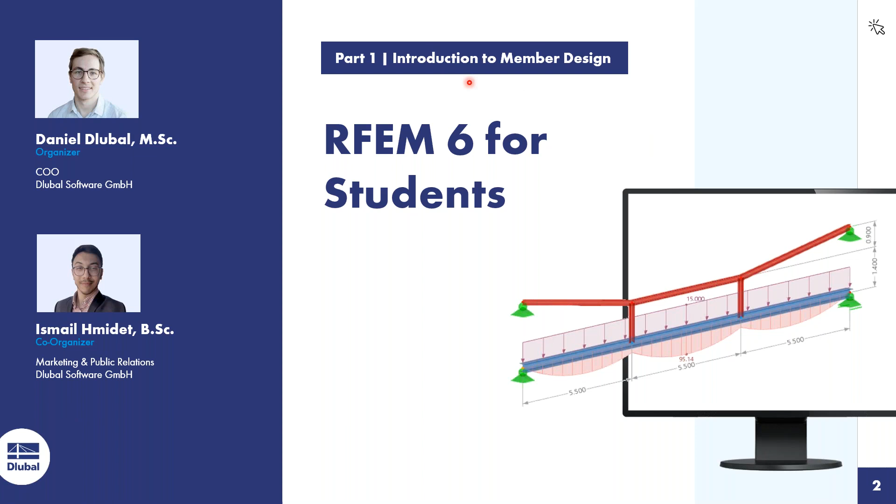So first part of this online training series, RFEM 6 for students. We have the part of the member design today. So we will give you an introduction to the member design and a few words to our platform, GoToWebinar. So you use, I guess, the web version. So you see it here a little bit like that.

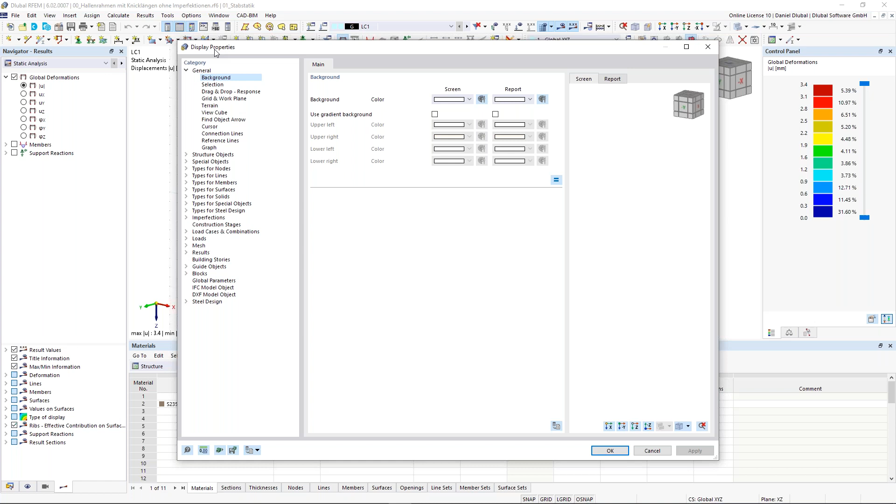Options is quite interesting. I work with a white window, so maybe some of you use a black window, no problem. When I go here to the display properties, I have the possibility to change the background, load a dark background. When I click on that, it changes to dark, and I use the dark background. So it's up to you how you will use it. I prefer the white background, so I go back to options, to display properties, and choose the white background and click OK.

We have today a lot of international students, so for those it's interesting that we also offer the program language in different languages. So let's click here on program options and settings. And here in the tab of settings, you have the possibility to choose a program language from those here. So for French, Spanish, Italian, and so on, guys, we have this language. I have here also some other options, but for now it's enough to know that in the menu bar you find all necessary functions and commands and so on.

Then we have here the symbol bar. The symbol bar is a fast access to the most important symbols you need during your modeling, calculation, and load application of your structures. If you want to create a member or lines, just click on that, and then you can create it. I love working with them, it makes the whole process very fast, and also some visibility options here and so on.

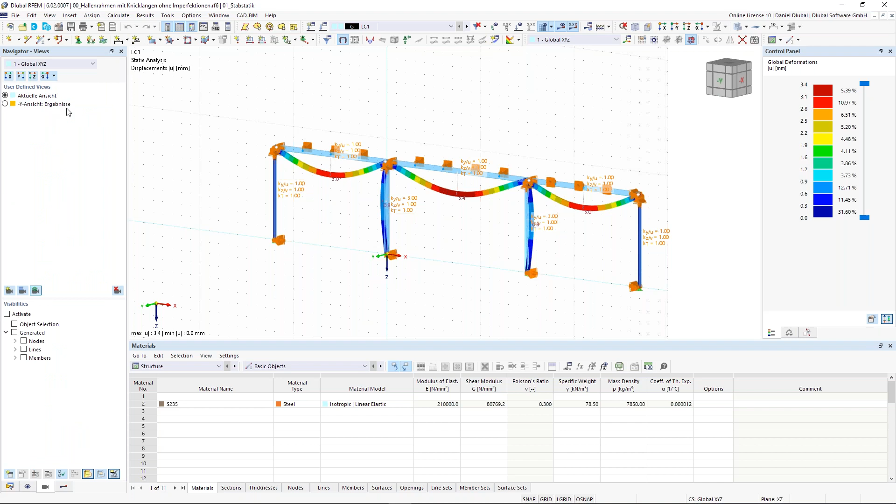Okay, the next navigator is the view navigator. Here I have the possibility to create user-defined views. Currently I see the structure from that view, and when I just want to see the results from the global y-axis or against the y-axis, I can click here and I see it like that.

Then I have also the possibility to set up some visibilities. I activate, for example, members and choose the member by section. I am interested in the IPE profiles, and I see it here like that.

Perfect, so let's jump to the last navigator, the result navigator. Here I have the possibility of showing different results, in this case the global deformation. When I'm interested in the internal forces, I activate the members, activate the internal forces, for example normal forces, bending moment, shear forces, and of course also the support reactions.

Yeah, so much to that. Then we have the tables, where you have a whole overview about all objects. You can also create objects in the tables, edit them, and change values. This is a huge advantage because it gives you a very structured, very good overview, which is very clearly structured.

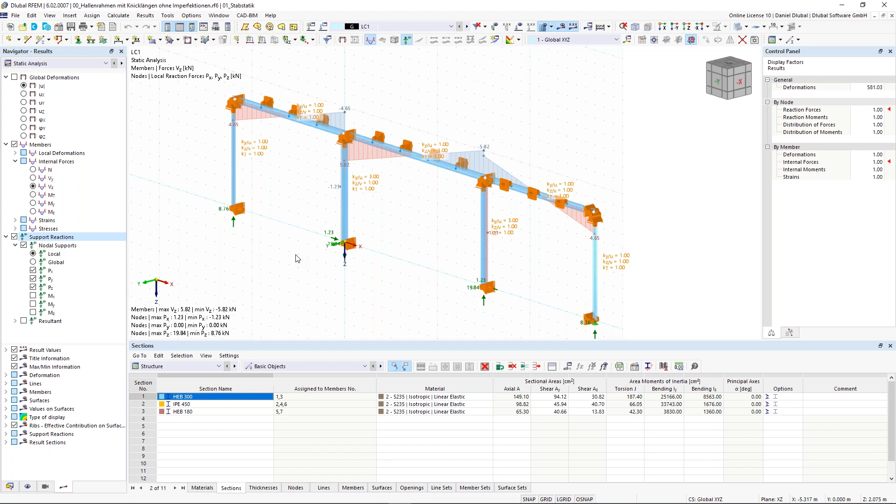Okay, now the control of RFEM 6 is quite easy. It's familiar when you are familiar with other software applications like CAD programs, AutoCAD from Autodesk, then you will get familiar also with RFEM 6.

So with the left mouse button, I can select different things. When I go from the left upper corner to the right bottom, then I can select all objects which are included in the selection window. When I go from the other side, I select all things which are also in this window, but not as wholes. I can select them as whole object. So everything that is touched within this selection window will be selected.

Okay, so much to that. When I want to select more objects, I click here on one object like this member and press the Control key on my keyboard, and now I choose another. I add new objects to my selection by pressing the Control key.

So in this case, I select here different members. And when I want to deselect some members, just press the Shift button and I deselect some objects from my selection.

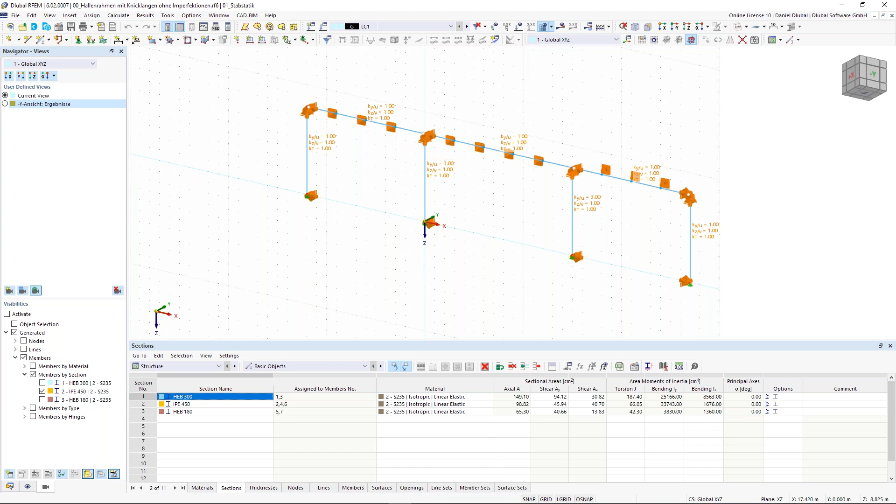Very nice. You can also use this view cube. It's a new function in RFEM 6 that makes it a lot easier to change your views for your structures.

Okay, good. Yeah, this was it regarding the introduction to the user interface of RFEM 6.

RFEM 6 is a 3D FEA program for the calculation of members and trusses, but also for surfaces, shells, and solids. With RFEM 6 as the main program, you can calculate and get the results of internal forces, stresses, support reactions, and deformation.

When you want to perform different material-based designs like steel design, timber design, and concrete design, you need the add-ons. The add-ons will be part of our later trainings in 3 or 4 weeks, when we jump into steel design, concrete design, and timber design.

Okay, now let's start with a very simple example. For those who would like to model with me, follow my steps. I create a new model by clicking here in the file menu and selecting create a new model.

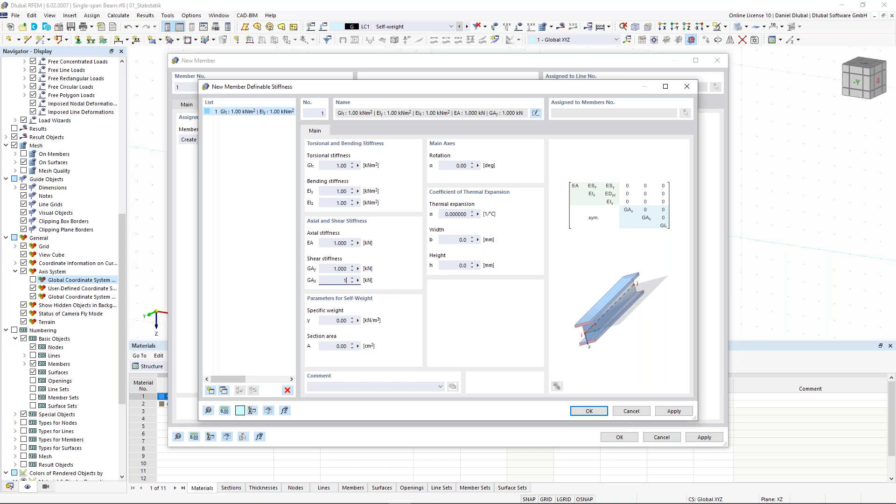I go here to the register Definable Stiffness and I create here a new stiffness. Click on that. And now I insert here very small values, because in reality we have higher values, but for this example it's enough to insert here a kind of pseudo stiffness. Okay, I click here on OK, click again on OK, close the member window, and then you see, here we have the member activated, and I click on OK, and the example is ready. So you see here this member.

Now we need support. I go here again to the symbol bar, click here on Assign Nodal Support, and I choose here the hinged support. So I will activate all translational forces. Choose here this node, right click in order to close the function, and now I go here back again and choose here the support with the roller in the X direction in order to release the X forces, and now I have here a single beam.

I can show the supports a little bit bigger just by right-clicking on it. I can adjust the size of the graphic, and now I activate load. In RFEM, when you want to create loads, you have to assign them to load cases. And with every new model, one load case, in this case the self-weight, is already created automatically in the background. So I jump here to the load case, go here to Edit Active Load Case.

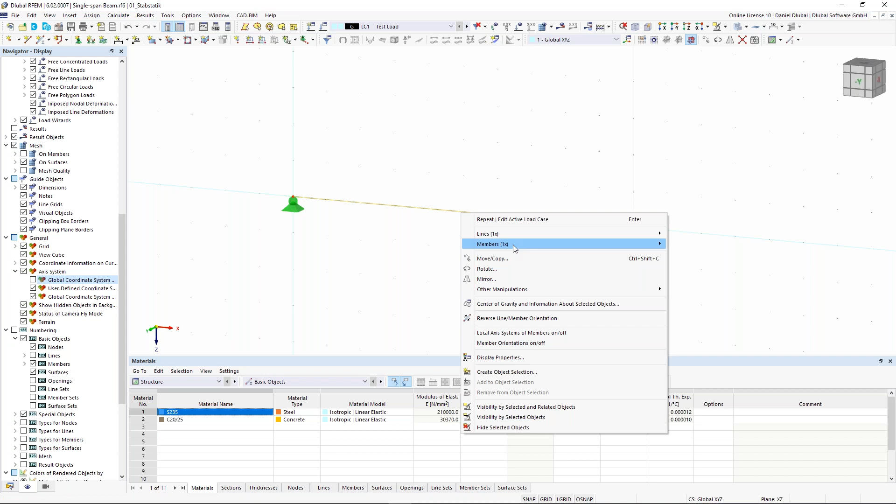And now I divide here this line, because in the middle of this member I want to create a node, and on that node I want to create a single load or point load. So right click on this member, and I divide it by distance. And now let's enter here the value of 4.5 meters. The other one is calculated automatically. And now the important thing is Create On-Member Nodes Without Dividing the Member. So activate here this option.

Then we get a node which is part of the member and doesn't divide the member into two members. So I click on OK. And now you see what I mean. We have here one member and this one node, part of the whole member. And the member wasn't divided into two members. It's a huge advantage, because then I can take a closer look at that member as one member. So, and now I create my single load.

I go here again to the symbol bar, click here on New Load. And now I click here on Assign to Nodes. So here I select the node in the middle. I can draw a selection window, click on OK. Enter here a value of 10 kilonewtons. I say OK. And we have here the node. So, the next thing is calculating the structure.

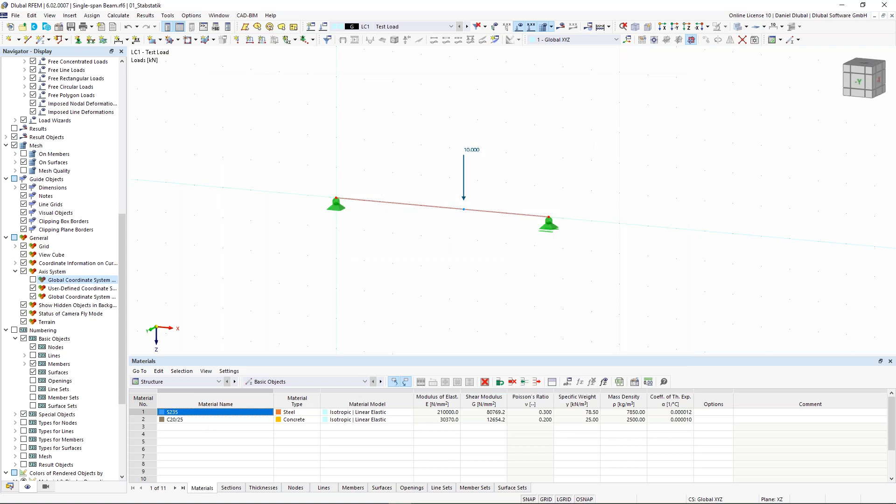Okay, so first of all, we see the deformation. The deformation is, of course, a little bit nonsense, because we have 99,000 millimeters deformation, because we don't have any stiffness. But in this case, only the internal forces are interesting for me. When you have statically determinate systems, the stiffness of a structure doesn't have an influence on the internal forces. Only when you have statically indeterminate systems does it have an impact.

Okay, so I go here to members in the results navigator, and I activate the shear force. I see the shear forces in kilonewton, and then the bending moment, My, 18 kilonewton meter. Interesting. Now I activate the support reactions. I see the support reactions, also pretty interesting. And now you can make a kind of plausibility check: compare the support reactions with the shear forces, for example, and they are the same.

So this was the first example. Pretty simple, of course. For the next examples, I will use real cross sections, because this makes more sense in my opinion. It was just an example for when you are at the beginning of the semester, you have started your bachelor, and you calculate some structural systems. Normally, you don't have any information about the stiffness, and here you have the possibility to consider these kinds of exercises.

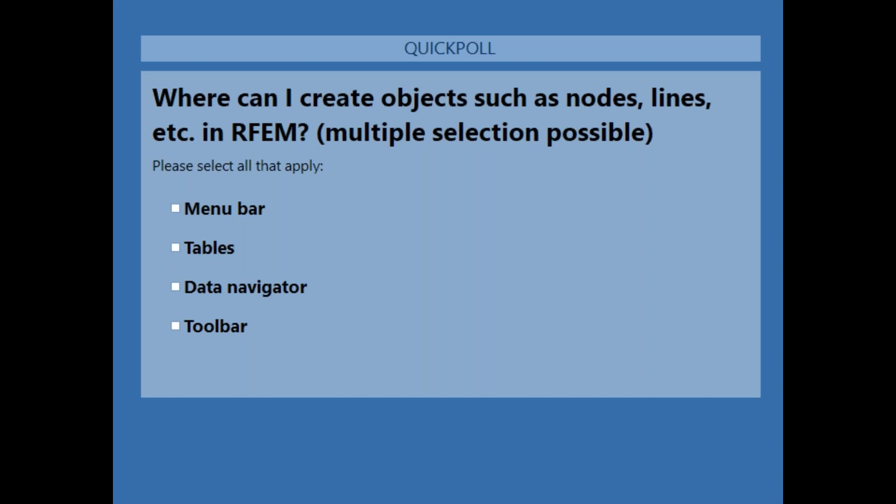Okay, this was the first example, and I have also prepared a question for you. It's a multiple choice question, so more answers can be correct. Okay, good. I will close this and share the results. It was a multiple selection, so several answers can be correct, and in this case, all shown answers are correct. I can create objects with the help of the menu bar, tables, data navigator, and also the toolbar. Okay, let's go forward with the next example.

This example is also for those who want to do this in parallel with me. Daniel. Yes. Before we move on to the next example, I just wanted you to highlight the difference. I got the question: what's the difference if the member were split into two? There's no difference in terms of structural behavior, right? Exactly, absolutely correct. There's no difference in the structural behavior and the results, just in the result interpretation.

It makes it easier for you because you can choose this one member, and when you would like to see the results at one member, just right click on the member and create a result diagram, and you see it as one result diagram. Or when you want to adjust or edit several members, and you have several nodal point loads, then it's easier for handling and usage. So there's no difference in the structural behavior and the results, just in the handling of how you define these nodes. Exactly. Thank you.

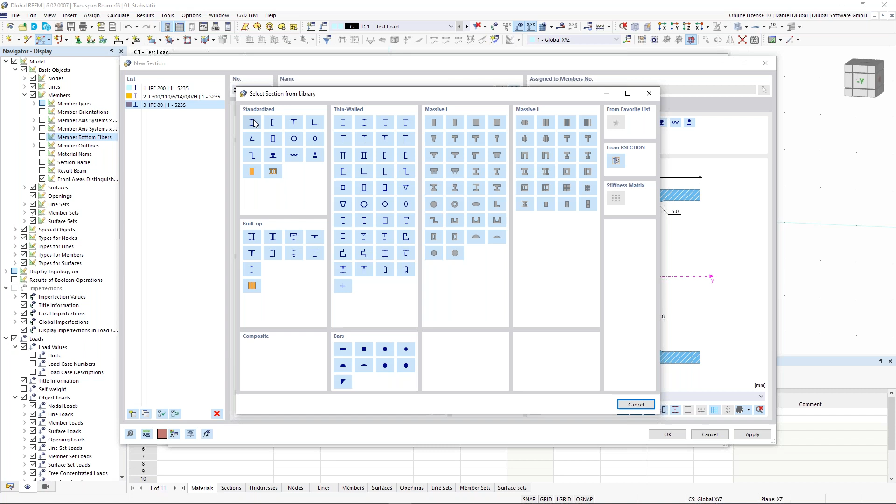And I open here the cross-section library. And I am looking for a standardized profile, so in this case, an HEB profile. So I scroll a little bit down and then I will find here this HEB profile. I refer to the Euronorm, so more to the Eurocode. And here I find HEB 300. This is absolutely fine for me.

When I know the profile, then I can also insert here the name of this profile, and this makes your searching for the profiles much faster. So just insert here HEB 300, and you jump here to the existing profiles based on our search function. And this makes this whole thing very fast. And now I choose here this Euronorm, double click on my HEB 300 or just press OK.

So, and the same thing we can also do with the material. I use for this profile an S235 material, so steel with a yield strength of 23.5 kilonewton per square centimeter. I can also create here a new one, searching for it with the help of the search function. So I can enter here S235, and now I can choose here the one I would like to have. But I don't do it because I have it already here in this case, so I cancel it. And I just need here this one. Okay, I click on OK.

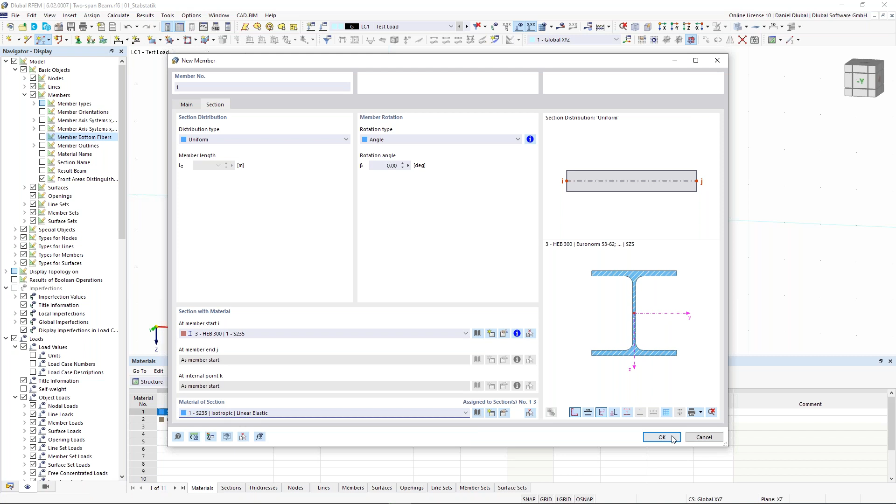And now you see here for my member start, I have here this HEB profile and this material. I click on OK. And now I create a beam with a length of 5 meters. So just go here to this grid point, 5 meters, and again 5 meters. So the total length is 10 meters, but in the middle I have here this node.

So the next thing is that I want to have here support directions. So I activate here this nodal support again. And now a very interesting function in RFEM is that we have here also this apply button. And I show you how it helps you to assign different objects easier for your structure. So for the first node, I would like to use here this hinged support. So I choose here this hinged, this node, click on OK. And now I don't click on OK, but I click on apply.

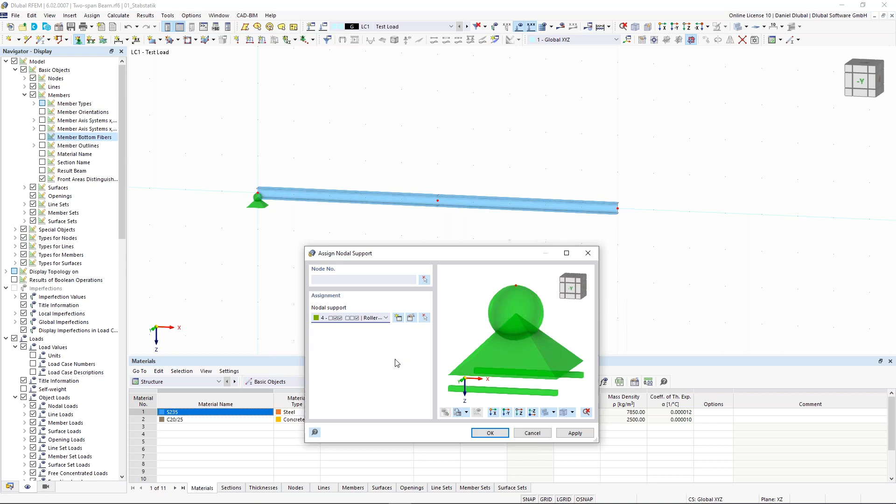And this node will be created automatically. And the next thing is that I change here the nodal support, choose here roller in the X direction, and select both nodes with a selection window. Click on OK again. And now I click again on apply. And now you see how easy you can do this with this dialog. I click on OK. And now you see here the structure. Perfect.

So what's next? The next thing is that we consider now different load cases. Because when I refer to my PowerPoint, I will show you my PowerPoint. We have here this two-span beam, the information about the profile and so on, and also here 3 different load cases. And I would like to combine them in order to determine, first of all, the results like support forces, internal forces, and so on, but also the governing or leading load combination that causes the largest internal forces, because we will have here also 2 additional load cases like the imposed loads, at first for the left side of the beam and then for the right side of the beam. Okay, let's go back to RFEM 6. Let's do this.

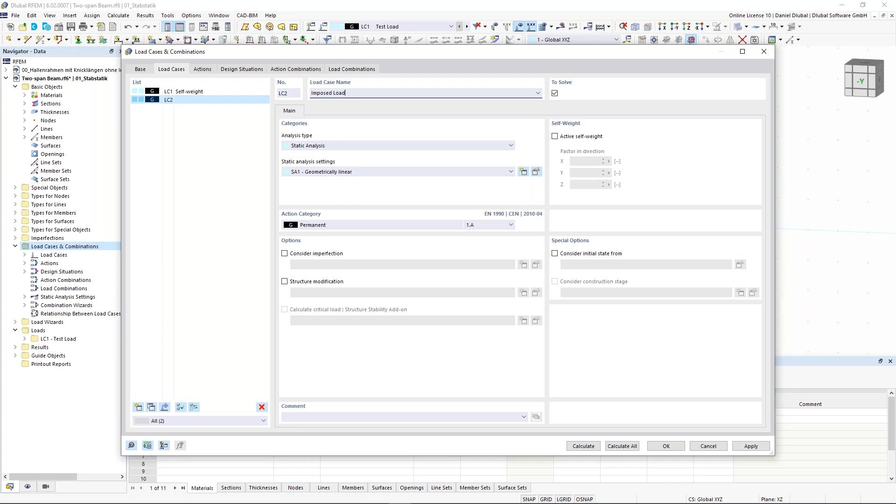I activate here the self-weight. And I create 2 new load cases. So the new load case is imposed load left. I choose the correct action category, in this case imposed loads category A, according to my European standard. And now I copy the load case and say right, because with that load case I apply the loads on the right field of this member.

Okay, now let's go through the tabs. So actions, I think this is pretty clear. I have here this permanent category, so permanent loads, in this case the self-weight, and here we can see which load cases are affected by this. Then imposed loads, these two load cases, and I have here different action types. Oh, come on. Different action types, alternatively, differently, and simultaneously.

When I choose simultaneously, this means that both load cases can be combined with each other. Alternatively would be they would exclude each other. So simultaneously would mean that load case 2 can be combined with load case 3. Alternatively, load case 2 with load case 3 can't be combined.

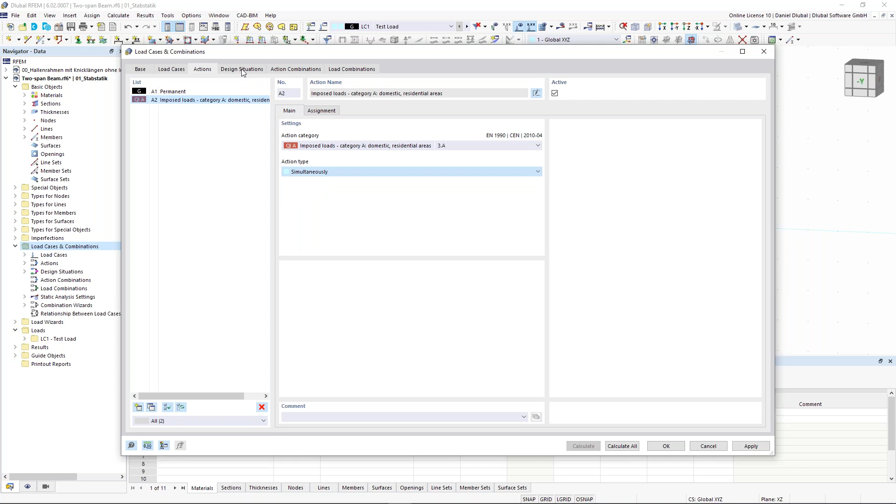Okay, so let's go to the design situations. According to the Eurocode, the European standards, we have different design situation types. The serviceability state isn't interesting for me, so I delete them. Just the ultimate limit state. I go here through the information, and here you see short information about the combination rules. So the permanent factors, partial factors, and also here some combination coefficients. So it's interesting how the program combines the factors for the load cases.

So now you can see here the action combination. Now let's jump to the load combination, and let's pick this one. So here you can see the partial factors, that is 1.35 times load case 1 plus partial factor 1.5 times load case 2, and so on. And now here you see also these leading load cases or leading action categories. It's pretty interesting just to know how the program considers these different load combinations. A load combination is nothing else than a combination of different load cases under the consideration of these partial factors and combination factors. Okay, I click on OK.

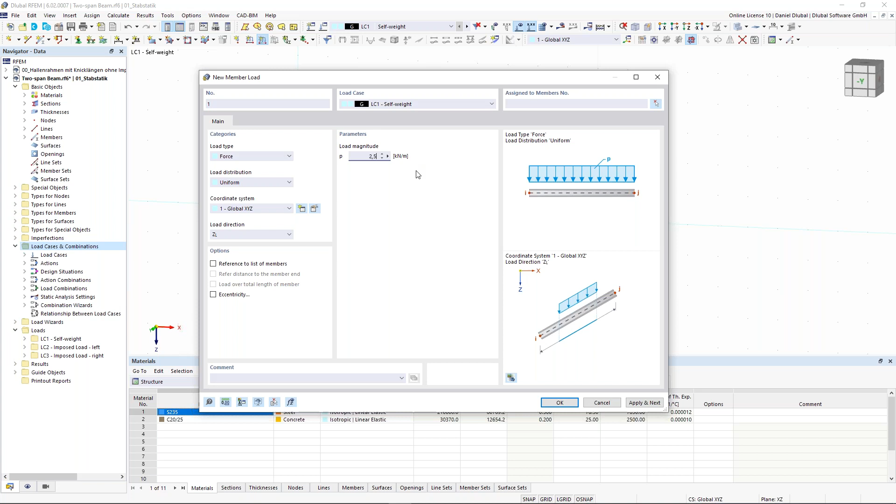So I click here on load case 1, self-weight. The load magnitude is in this case 2.5 kilonewton per meter. Now I select the members, draw a selection window because I want to select all members. I click on OK, and now apply and next. And now this is a perfect thing: I can change the load case, change here the load magnitude to 5 and assign it to the other member, but stay in the same dialog. This is pretty nice. Makes a lot of fun for me.

I click on OK, say again apply and next, and the same thing I do for the right load. So for the right field, click here the right field, click on OK, and then in this case it is enough when I click on OK. So let's make a kind of plausibility check, go through all load cases. I have here the self-weight, the imposed load left, then the right one, the ultimate limit state. So this will give me an overall result of all load cases. Oh, and here we see it with the partial factors.

So maybe some of you know already what I want to reach with that example, because I want to see which load combination is responsible for the highest field moment and for the highest support moment. And this can be done with this ultimate limit state, with this design situation. So now I would say, let's calculate it. In this case, I choose here calculate all.

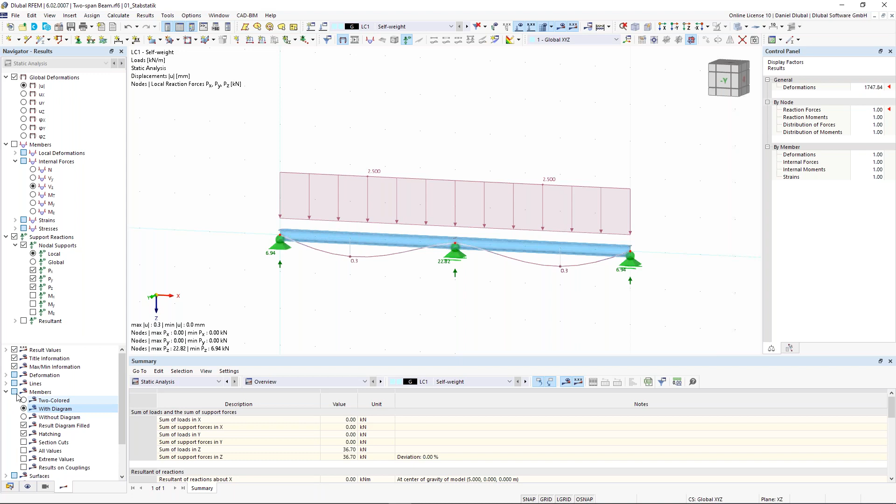Go here to the chapter of area members, with diagram, and here deformation, section colored. So this is a deformation, sorry. So the area deformation, members and section colored would look like that. You can see here on the right side a kind of control panel where you can see these colors.

Okay, the next thing is the verification of the vertical or the support forces, and I see here as sum, the sum of loads in the Z direction is 36 kilonewton, and the same sum here in support forces, so there is no deviation, and this is good for me. Okay, the next thing is, let's go to the design situation.

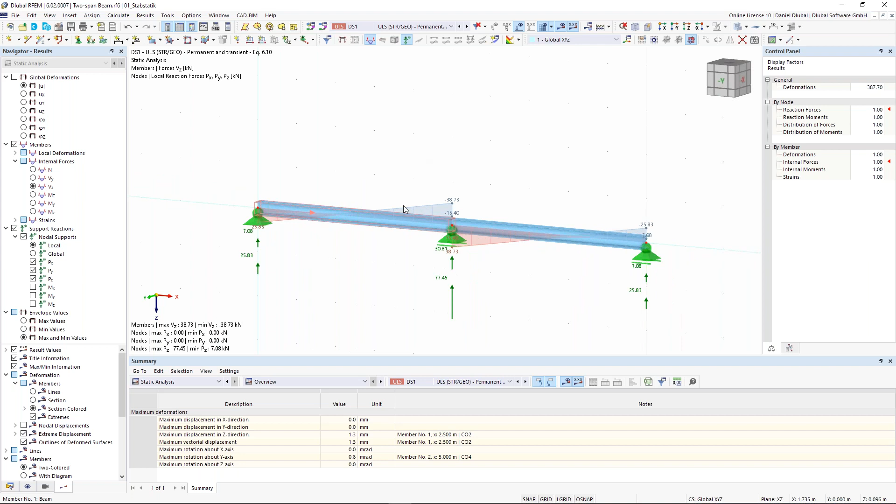And as I said before, I want to see envelope values. So let's go to the members, and now you see here different kinds of distribution values of the shear forces and also the bending moment. And I can say, okay, please show me the maximum values. So in this case, the maximum field moment. And when I take a look at the minimum values, I see it here. So the minimum is here, minus 37. So the support bending moment.

Okay, this is the summary, and now it becomes interesting because I want to see the results by member. So I go here to the table, static analysis, results by member, and I go here to the internal forces, and now I want to take a deeper look at the maximum field moment and the maximum support moment. So the most minimum and the most maximum value. And here I go to the extremes area, and here I see these two results.

So I see here the maximum value of the bending moment My, and now I see also the corresponding loading, and this is in this case load combination 2, and for the minimum value it's load combination 3. Now let's take a deeper look at how the load combination looks. So load combination 2 was this one. I think this is pretty clear. And load combination 3, here we have the support moment. Okay, this can be done with the design situations, a pretty interesting tool and function to know.

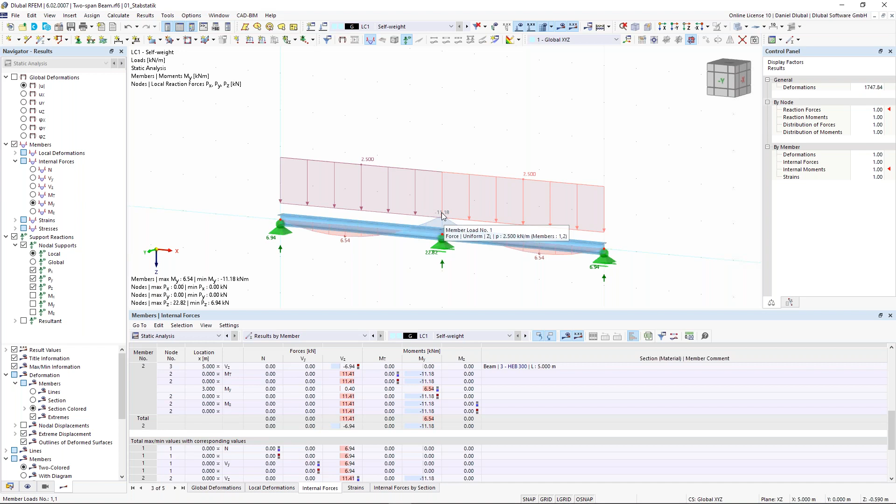What is the shear stiffness? Taking into account shear stiffness leads to an increase in deformation due to shear forces. In order to deactivate it, you have to go to the cross-section and then you can deactivate it. So remember here the support bending moment of minus 11.18 kilonewton meter. I go here to the sections, in this case HEB, double click on that. And now you can see here deactivate shear stiffness.

And the influence of the shear is dependent on the cross-section areas Ay and Az. When I deactivate, they have no value, and the shear stiffness isn't taken into account. And this can also be considered for your hand calculations. Because when you calculate by hand, with the help of some tables in your books, then it is kind of rigid. The books take no shear stiffness into account.

But in reality, there is a little bit of shear stiffness, especially when you have solid cross sections or timber cross sections. However, it is recommended to consider the shear stiffness for the deformation analysis. But just in order to show you the different results, remember minus 11.18, I click on OK. I calculate this load case again.

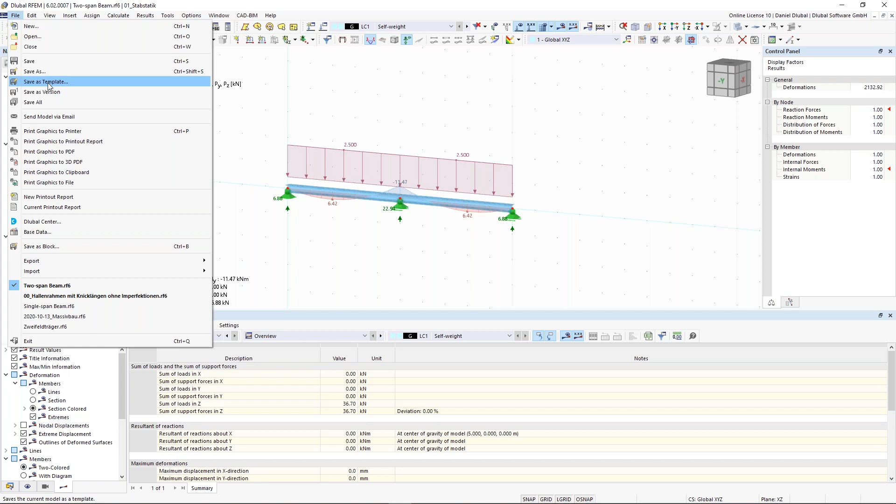And they actually asked, what if we're talking about codes or standards of different countries? I think you could probably show that we do have a lot of different standards predefined in RFEM. And in case you don't have the standard you need in RFEM, of course you can define those and save them as a template, as Daniel just showed. Exactly, right Daniel? Exactly, you're completely right.

So if you want to take a closer look at the standards we support, go to your project or model and right-click base data, or also here in the symbol bar you find this option, click here. And as Ismail mentioned, we support different standards. Just go to the add-ons, you can activate maybe for steel design different standards. So I click OK, and then you see that we support different standards, and also here the different national annexes.

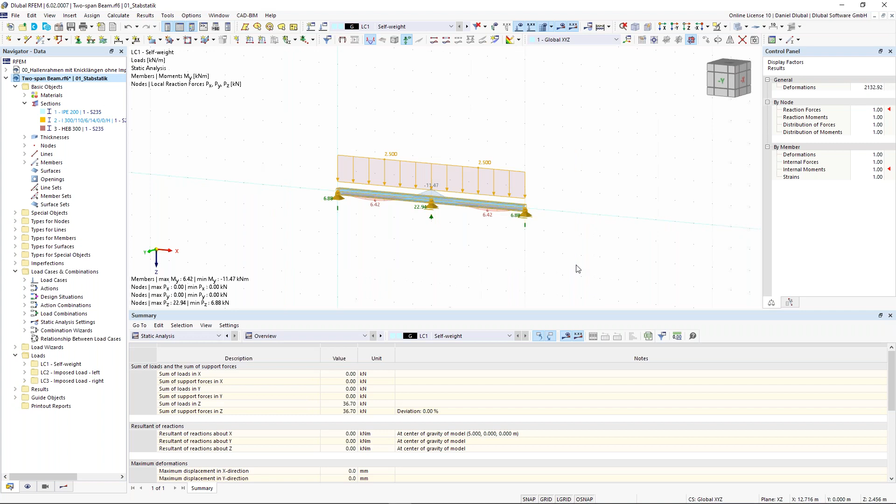So let's continue. Now I will do an example by myself, so I will make it a little bit faster. Just watch and learn. I delete everything again - oh no, sorry, I don't want to delete everything. Now I want to add hinges. This is one-time statically indeterminate, so I want to add a hinge here in order to make it statically determined.

So how to do that? I click on this member, then I change the visibility mode for better visibility, to this wireframe mode. Then I right-click on members and divide the member by distance. And now I would like to divide this member at a percentage of 17%.

Why 17%? In my German student book, it's called the Schneider-Bautabellen. There's a hint that in order to make the support bending moment and the field bending moment equal, the perfect location of the hinge is from the middle of the support, 17% of the length of one of these fields. So I click here on 17.16 - this is given by my table book. The division point is calculated automatically. Then I click on OK, and a new member was created.

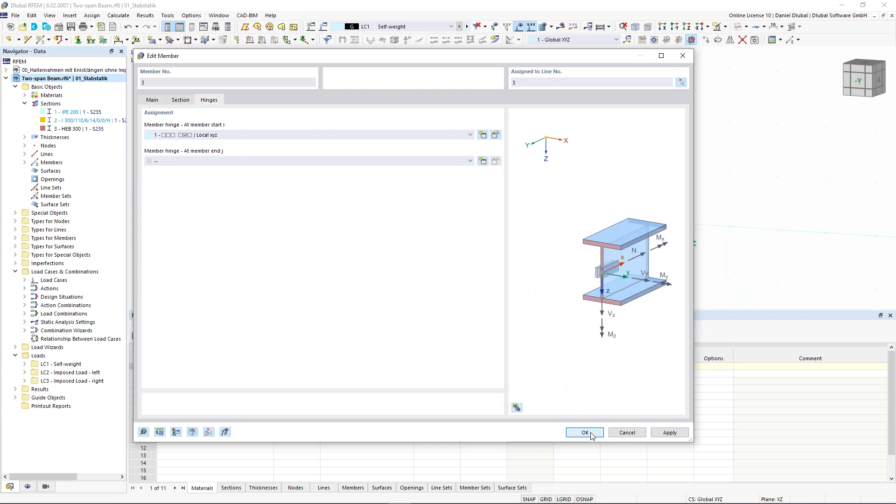Right click on this member, local axis, and the other thing is the member orientation. Now you see it: from left to the right, the direction goes from left to right. This means I have my starting node on the left side and my end node on the right side. The member orientation is compatible with the local x-axis of my member, and there I can also see the local axis.

So much to that. I deactivate this, and now I calculate this structure again. Watch out, pay attention, and see what will change.

We have assigned here a hinge, and this hinge means that the moment is 0 there, and it is 0. Additionally, we see that the field moment is 7 kilonewton-meter, and the support bending moment has the same value.

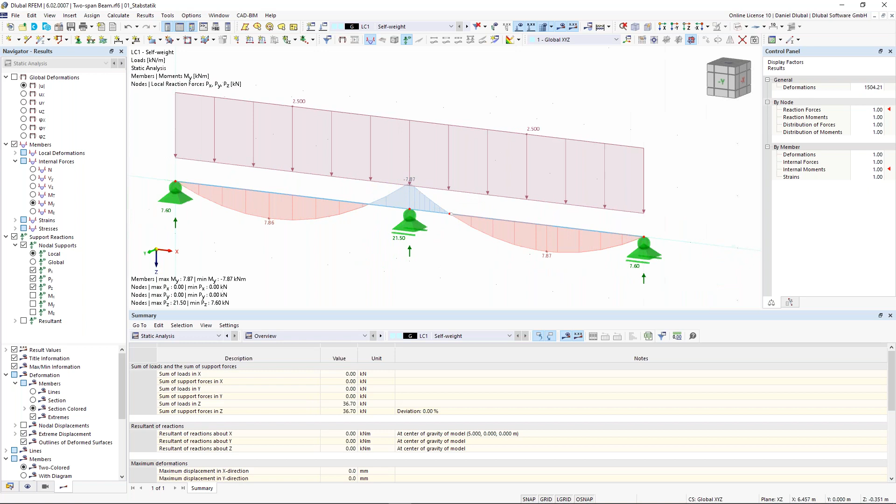Okay, so in your studies you work also with variables and parameters, and I want to show you how to do this also in RFEM. So when you have the exercise that this two-span beam has a length as a parameter L, and this has a parameter, and this has a parameter, then you can do this also for RFEM 6.

So I go here to structure. This is something you don't have to do with me right now, just pay attention, I will show it to you. I have here these global parameters. I click on global parameters, and now I give them a name, L for length. Then I press the tabulator button. The unit group is in this case length, and the definition type is in this case value.

So I insert here a value, but I can also give the whole thing a formula, but in this case a value. I insert 5 meters and comment it with 'length', so I know later that L is length in meters. And the same thing for this distance, this E, so this 17%, I give it the name E.

And now I don't want to use a unit group here. I want to use factor, because it refers to the existing length by giving it a kind of percentage. And I give them 0.1716, and this is the factor. Okay, I click on OK.

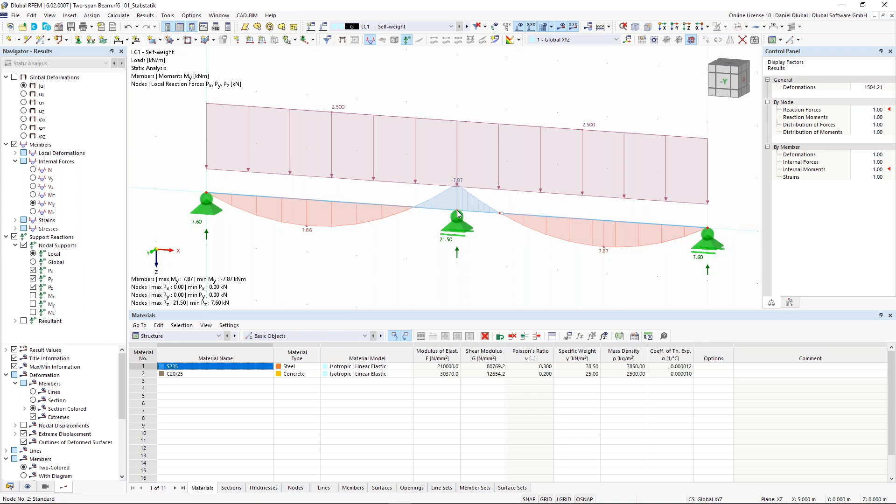Now I have to assign these parameters to my structure by manipulating the coordinate system or the coordinates. So the first thing is that this node will remain at its position. The next one needs to be changed. So I activate, double click on this node.

I want to manipulate or set the formula, give the x coordinate the parameter L. So I click on this arrow, click on edit formula, and insert here just my L parameter, and click on OK. Click again on OK.

And the same thing here for this node. I activate the formula, and in this case it's L plus the factor E times L again, which gives 5.858. I click on OK.

And last but not least, I do the same with the last one here, just pressing 2 times L. Click on OK. Click on OK again.

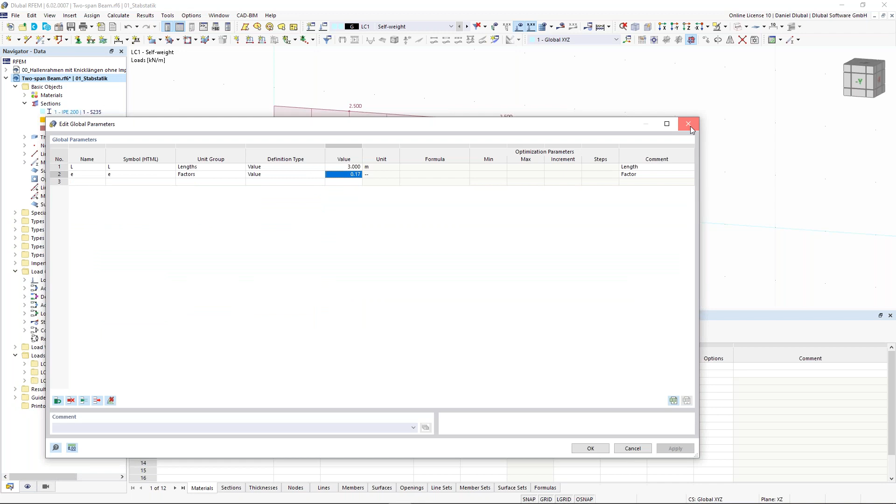And now I want to change the values, so pay attention to the structure. I insert here the value 4, let's do 3, and say apply, apply. And now you see how the structure was changed through these parameters. Interesting. Okay, so much to the parameters.

Next thing is just a structural system with various types of loads and also some supports. So I delete this again.

Now I will create the nodes with the tables. I go here to the structure, go to the tab nodes. So the next 2 examples you don't have to do with me. I will do it a little bit faster, just giving you an overview about how you can do things in RFEM 6.

So I create here a new node, going through the inputs with tab on my keyboard, and now I insert here the coordinate 0 and 0, press enter, and the next coordinate is 5 and 2, press OK, and the next one is 8 and 2, press OK. Now you see here that I have these nodes.

Now I create a new member, the same thing, the section is HEB 300. I click on OK and I connect the nodes in order to create my system. Right click.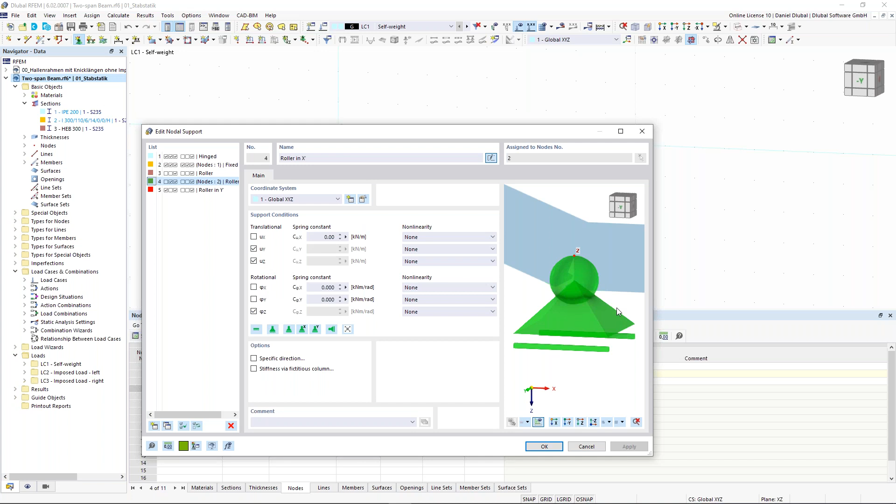So when I want to have this support carry vertical forces, I have to activate the UZ, because then it prevents the deformation in this direction, and therefore I will also get vertical forces. And the same also for the rotations. Okay, so much to that. I click on OK.

And now I leave here this load case self weight, and now I assign or apply some loads. Just various loads, it is not a realistic example. I click here on new member load, and in order to have also some linear load distributions, I can say okay, I want that trapezoidal load distribution.

I will start at the beginning of my member with 10, leave it here as 0, and say okay, at 80% it should stop. I assign it to that member, and this is now the nice thing, that I can remain here in the same window. Okay, apply and next.

And the next member load is another one on the second member. So I activate here 1 and 2, give them here 20%, and choose the second member. I click on OK, and then I click on OK again. And now you'll see here the applying of these member loads, pretty interesting.

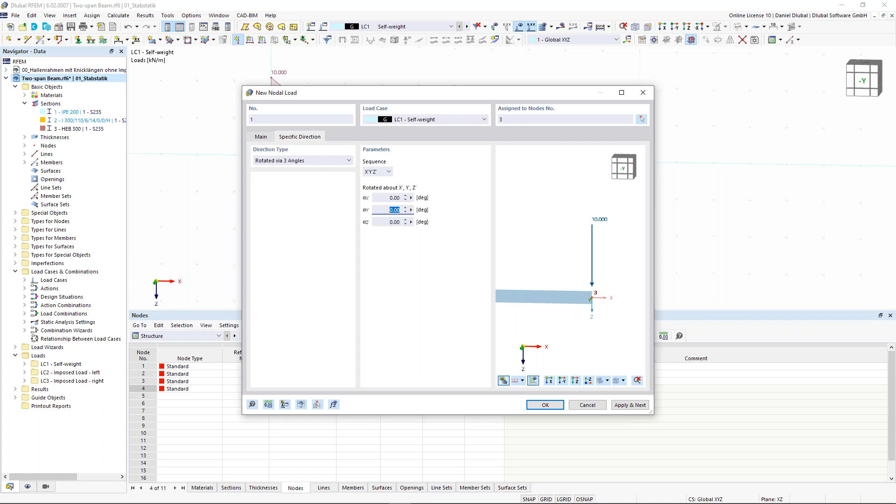And now the interesting thing is that I can see the image where the node load will appear on the whole structure. I can see it here. And now I want to specify the direction, so I activate this option, a new tab appears. And there I say okay, around the local y-axis, minus 60 degrees. And now it looks like that. I say okay. And I see the direction like here.

And one thing more, I can also give some nodes a kind of imposed nodal deformation. So here I find this in the symbol bar. I say okay, new imposed deformation, and in the opposite of the global Z direction I say okay, minus 20 millimeters. I assign it to this node. I click on OK. I say OK again.

Now I will calculate the structure. And for me it will be interesting to see the results regarding the deformation, because I set that node to a predefined deformation in that direction. And now I will see if it's correct.

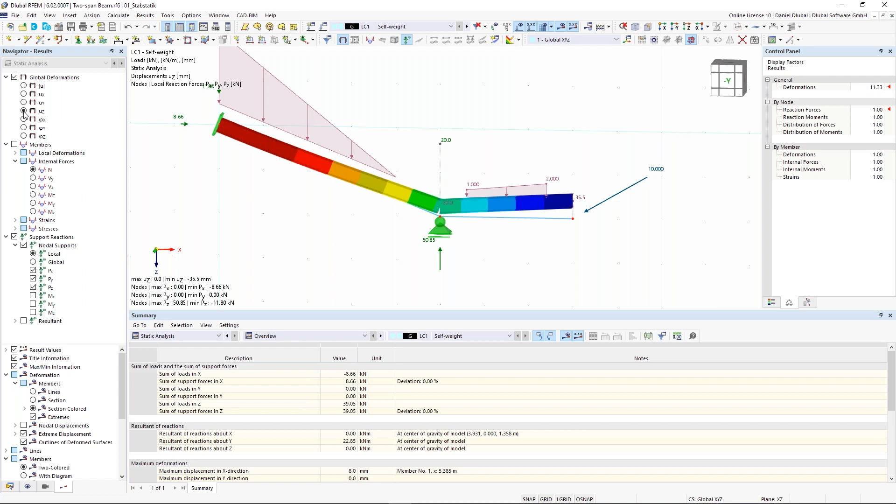Okay, well, internal forces, you can see the internal forces, shear forces, normal forces, and so on. But for me, the vertical deformation of this node is more important. So I activate the global deformation, and now I want to see the UZ, so the vertical deformation. And I just want to see the lines, because then it's clearer to see the results. And yes, it's correct. Although there is a support, we have deformation at the support of 20 millimeters in the opposite global Z direction. Okay, so much to that.

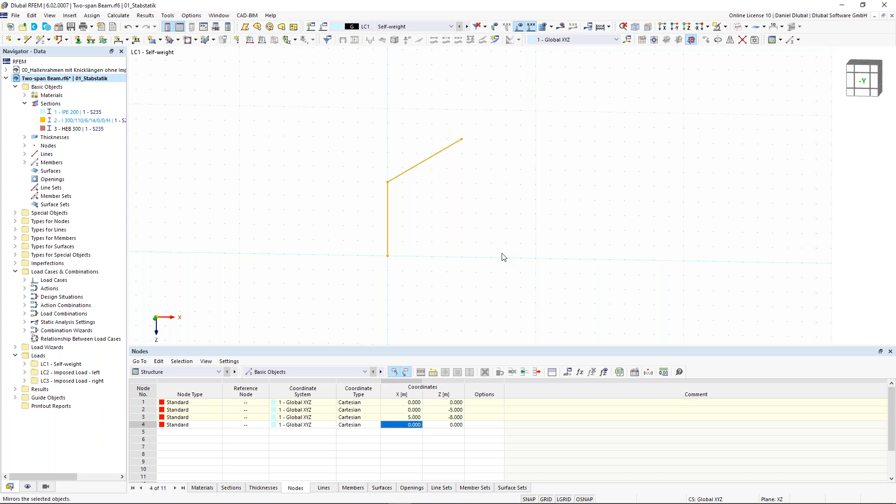Now you can also copy, rotate, or mirror existing objects. So I select the whole left part of the frame, right click, and I want to mirror it. I want to create a copy of that. Choose the point here at the top of the roof, and then YZ should be the plane. I click on OK, and you see now the other side.

Okay, the next thing is that we add an additional rod. And now we have different member types. You can see here the member type beam, and this member type transfers all internal forces to other beams. I can add additional hinges to that beam. Let's do it that way, and then I will explain other member types. So hinges, I activate phi y, so that we will have bending moment hinges.

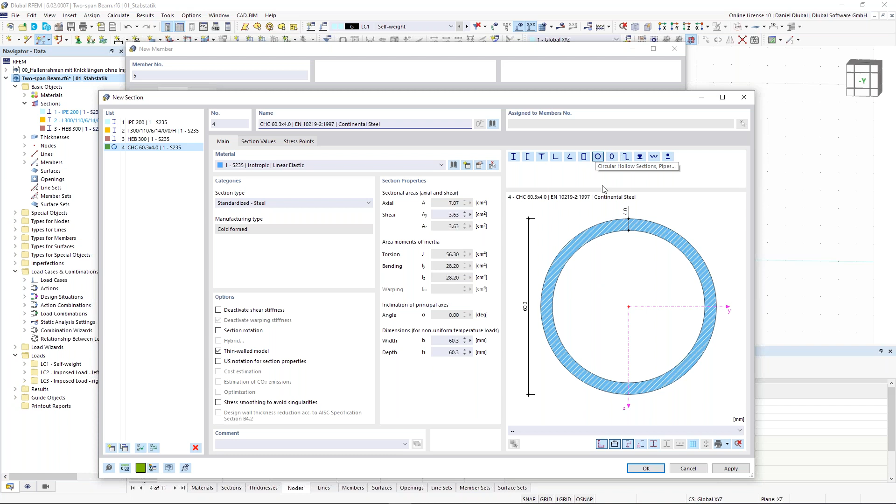And because it will get tension forces, I can choose a smaller profile. So I will create a new profile. I will choose here CHC. I hope it will find it. Okay, and I choose this one. It's a circular hollow section. It can be used for applying normal forces. Pretty nice. And I say okay.

Now I draw this tension rod from the left side to the right side, and maybe I change the display model in order to see the right profiles. And now I create the nodal support, click on OK. And now I apply the loads. First of all, I see my load cases. I have self-weight and imposed load from the last example. I want to change it.

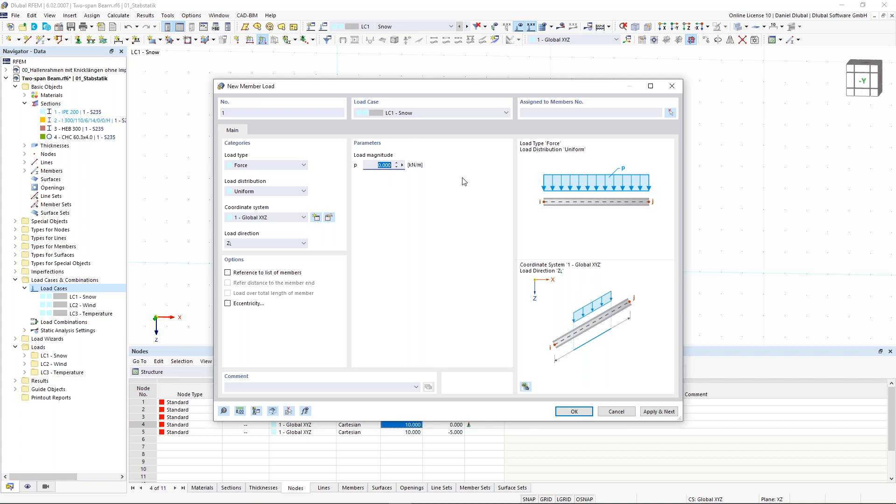Now I apply the loads. I jump to the snow load, go to member loads, and I have 1 kilonewton per meter. And the load direction for snow loads is different. It's not on the true length, it's on the projected length. I choose both members. I click on OK. I say apply and next.

And now I choose the load case wind. Here the direction is the global x-axis. So I say true length, first of all on the column. It doesn't matter if you have it on the projected length or the true length, because the column is vertical. Column, I say okay.

And now I want to refer and apply my load according to the local member system. So I say, okay, I want to have it like that and put it here, because normally the pressures are on the local axis of my inclined beams. So I say apply next. Now it looks like that.

And now the temperature, we will do it here a little bit different. I cancel the whole definition because I wanted to show you how you can make an object selection. So first of all, I want to display different cross-sections with a different color. So I jump here to the display navigator, scroll down to the area of the colors of rendered objects by object property, member, and now I want to see them by the sections, like here.

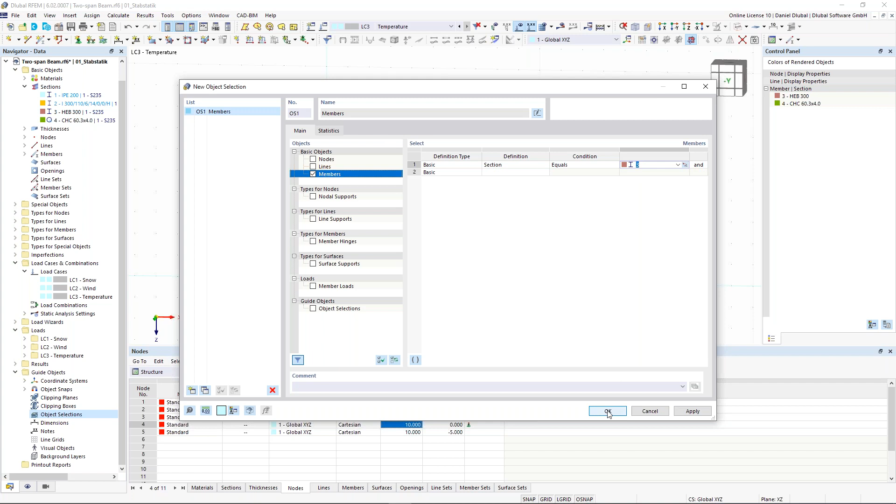And now I want to do an object selection with the type of members. And the definition is the section equals, and now I choose my reference member, and this is this one. And now you see, okay, equals member or cross-section number 3. I say okay, and now, oops, and now I see here these cross-sections are selected by the help of this object selection. And now the nice thing is, now I can apply the temperature very easily, because these objects are selected,

and I choose here the temperature change 35 and local Z, and I say okay. Good. Now let's calculate all load cases. Then we will take a closer look at the results.

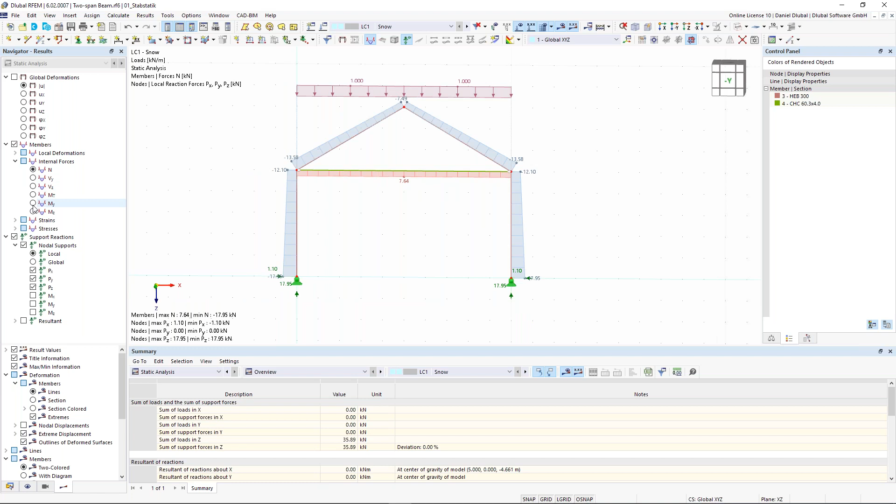Okay, perfect. So as you can see here, maybe for the snow load, you see here the deformation. And also the internal forces, and as assumed, the tension rod gets tension forces. And also when I take a close look at the members, I see it like here and so on. So now we have in RFEM different member types.

This member type is a beam, but with hinges at the end of the member. In order to consider the same structural behavior, I can also choose the member type truss. Truss is nothing else than a beam type, but with moment hinges at the end of the member. Then we have also another thing. This is truss, only normal forces. So only normal forces are activated, no bending is possible. When I have the truss, the member can take some self-weight, and truss only normal forces.

Let's do this truss only normal forces, and you will see how it will affect the results. Yeah, and as I said before, this member type doesn't consider any bending moment, only normal forces. And although we have here self-weight activated and the circular hollow section has some weight, the bending moment isn't considered here because we have the member type truss only for normal forces. Okay, so much for these member types. We will use this member type truss only normal forces for the next examples regarding the truss structures.

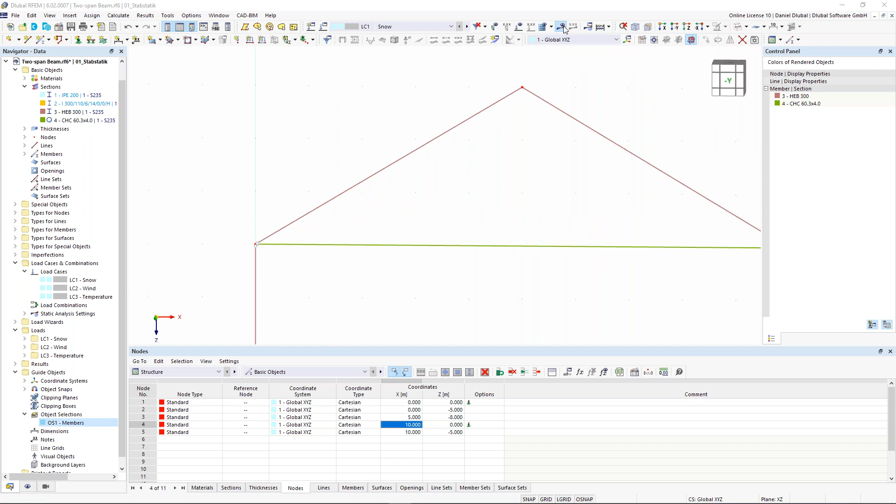So we can test it. I activate it. Yeah, and you see here this error and this failure because we have a singular stiffness matrix, because the structure is unstable in that node because of the chain of hinges. And in order to avoid this, you have to remember just one thing. If you want to build a complete hinge where all members connect, then you have to leave one member without a hinge.

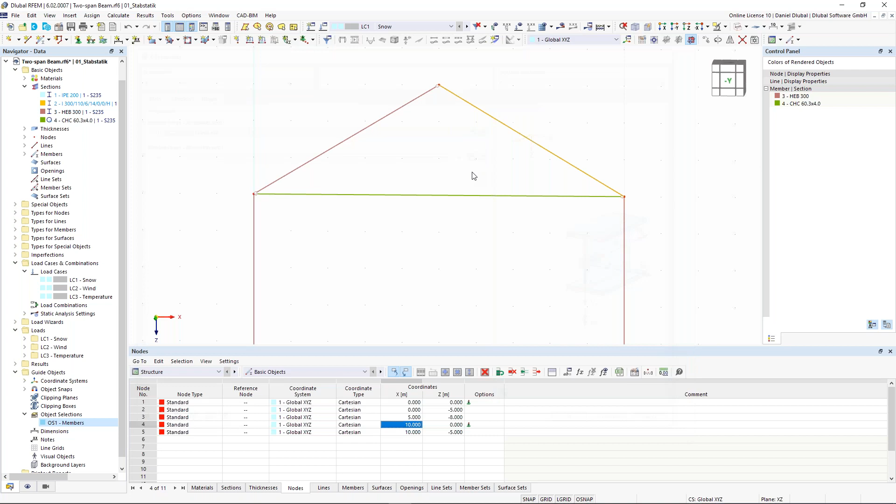So I show you now the correct modeling of this thing. I deactivate here the hinge, and now I want to have this whole triangular thing, where all things are connected with hinges. So first of all, I change these nodal supports to fixed ones, and the next thing is that I assign at the top also a hinge, and the same thing for this member. Click on OK, and this would be the correct definition when I want to consider, I don't know the English word for that, hinges everywhere.

Now I calculate this, and when we take a closer look at the bending moments, we will see that the definition was correct. Yeah, and we see it here. Here we have the bending moment, and every place where there is a hinge, we have zero moments. And this would be the correct definition of the hinges for that case, for example.

Okay, next example: truss. I go here to the PowerPoint. So, ideal truss. We have here a truss with different members, and the members will be of member type truss, only normal forces. An ideal truss is weightless, straight, only carries normal forces, axial tensile or compression forces, and all loads are applied on the nodes or on the hinges. In reality, we don't have any ideal trusses, but in your study you'll learn how to calculate these trusses. And now I show you how to consider it in RFEM.

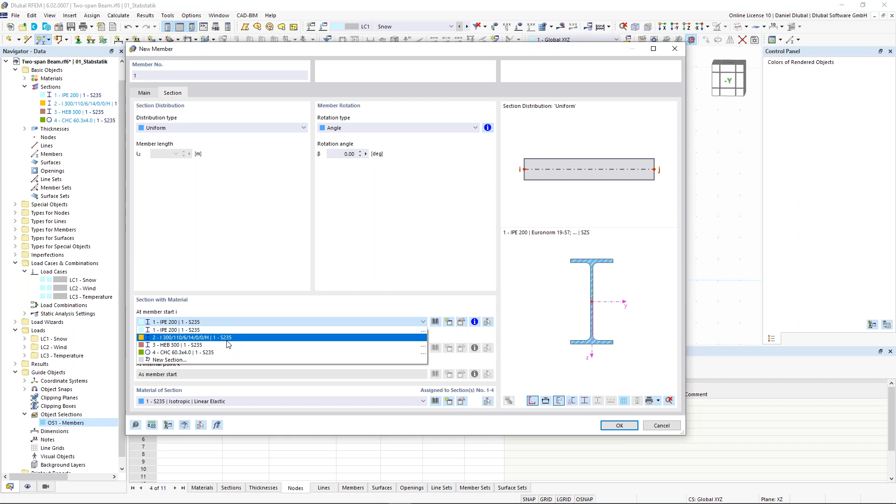And now I put in the length and also the direction. I have here 3 meters. All sides are similar, so I choose this one. 3 meters. Angle in work plane is in this case minus 30 degrees. Then I can do this like this one. I change this. So now I draw, or I can refer to this member. I say OK. And now I have this triangle.

And now, very important, my favorite function in RFEM 6: I select everything here, and per drag and drop I can copy selected objects very easily. I press the Control key on my keyboard, click on the left corner node, and per drag and drop I copy it from there to there. Same thing again. And this is my absolute favorite function. Please remember it, you will use it very often.

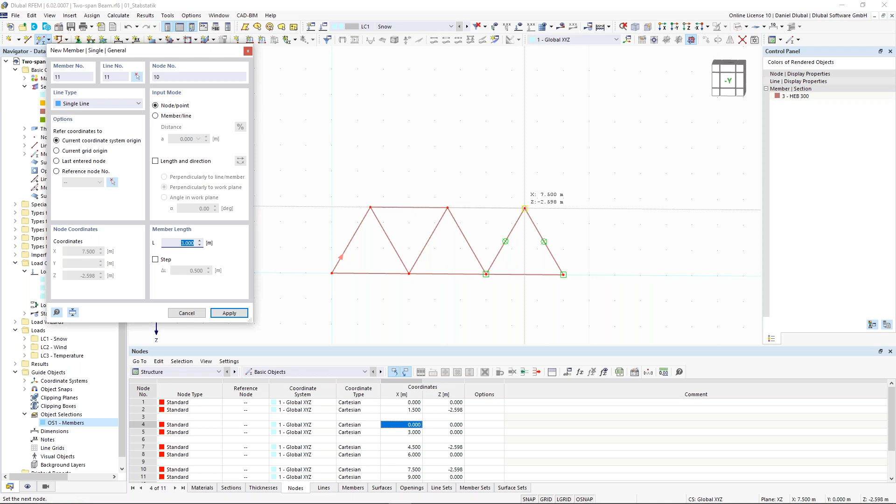And connect here these two members. So, now I have to correct the member type because I saw I have created the member type beam. I select everything, and now when I just double click on one of the members, you see, okay, there are several members to assign, and I choose here truss, and I can change all members at once to the member type truss only normal forces.

Perfect. So the next thing is assigning them nodal supports. I give them a nodal support, hinged, and here again. I make them a little bit bigger, like that. And now I assign to these nodes nodal loads.

So I go here, new nodal load. I select the first node with 10 kilonewton, click on OK, say apply and next, and the next one with 20 kilonewton I assign to the right node, click on OK, and say OK again. So again, show me the results. I say yes.

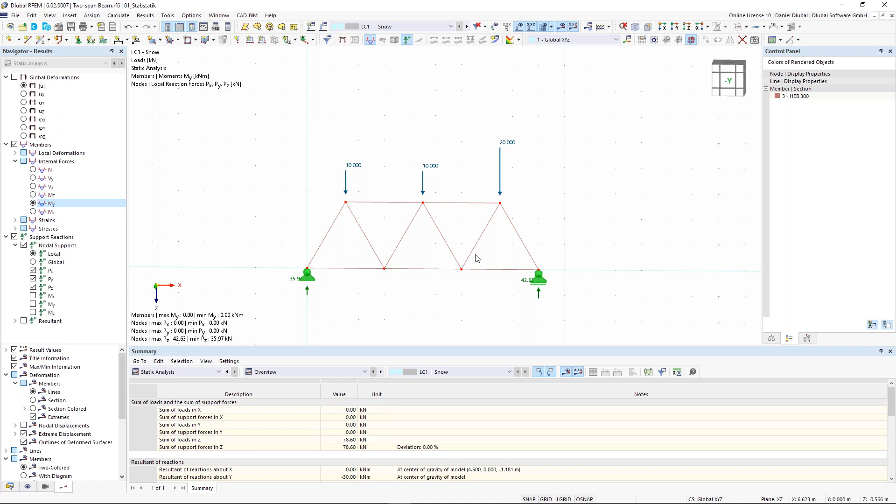And the special thing about the trusses, and also about the member type truss only normal forces, is that only the stiffness in the length direction is activated. So let's take a closer look at the results. And you see no moment, only normal forces. And when you see here member type truss only N, then you see, okay, only normal forces are carried. And only the stiffness in the length direction is considered.

So let's go back to the normal forces. Now remember, all compression forces are in general negative, and in RFEM with the standard display options, blue, and all tension forces are in general red and positive. And you see, here I have the tension chord, and here the compression chord, and here you see the different normal forces. So again, negative normal forces are compression members, and positive normal forces are tension members. Okay, so much to that.

And then there are also some members called zero-force members, Nullstäbe in German, which don't carry any loads. And there are different rules how to determine these kinds of zero-force members. And you can also do this with RFEM. So I will add now these zero-force members. I don't know if the English word is the correct one. I select here the properties, the same like here. Click on OK.

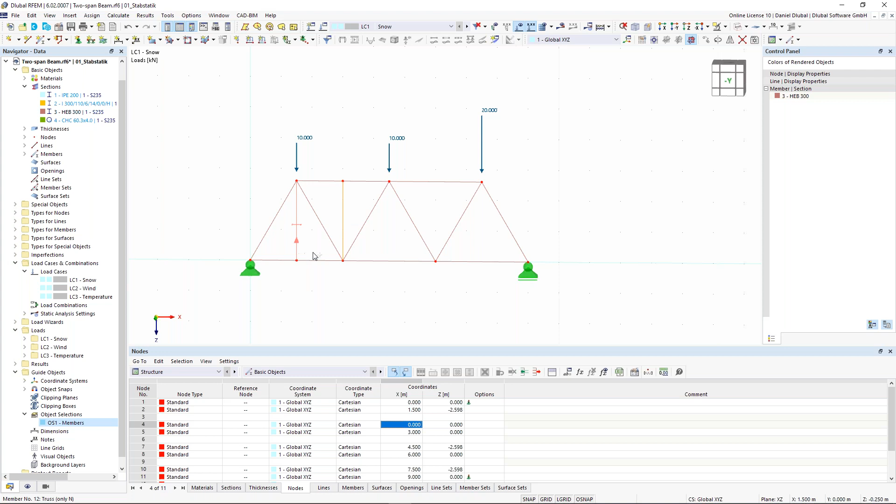And now I draw this member. And now again with my favorite function, drag and drop, press the Control key and copy it from one side to the other one. And now the nice thing is you can also add more things to your selection, and I can easily drag and drop it like that. Perfect. And the last also for that. Okay, good.

And there are different rules in order to determine these zero-force members. These are the members which don't carry any normal forces, but are sometimes responsible and also mandatory for the whole statical indeterminacy. So let's take a closer look at that. I will calculate it again.

And a classical student example would be: calculate this truss structure and determine also the zero-force members, so the members which don't get any normal forces. And also determine the positive and negative normal forces, so the tension and compression members.

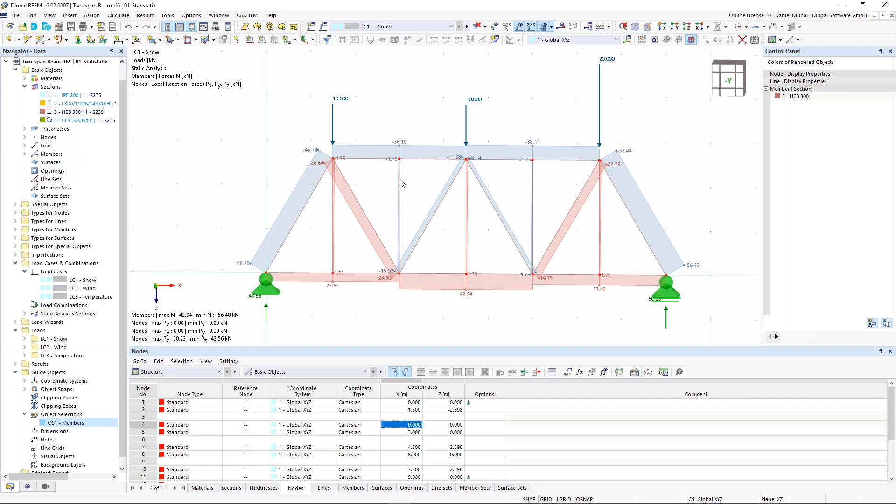As you can see here, these members get some normal forces. This is a little bit strange, but I can tell you why they get these normal forces: because I considered the self-weight. Here in this load case, I deactivate it. Now I calculate it again, and now you will see that these members don't get any normal forces because of their structural behavior. No normal forces. So much to that. Okay.

So I have a poll prepared for you, which summarizes this chapter a little bit. So this one. Okay, let's close this poll. And the correct answer is that compression members are usually truss members with negative normal forces. And in RFEM 6, this is usually the case for these blue colored normal forces, because there we also have a negative value, and now you know it. Okay.

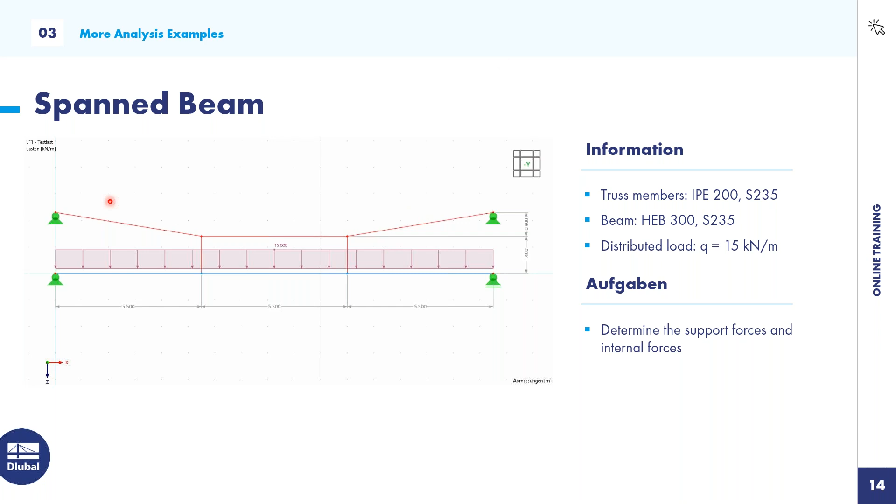So I create here again a member with a HEB cross section. I click on OK. And the length of this member is 16.5 meters. I say OK. And now I divide this member internally into two nodes in order to get two nodes.

So right click on that, members, and divide member now and intermediate nodes because they will have the same length. I click here on 2 and select here this option. This option will cause that the member is not divided into different members, but we will get the node. So here we have the blue nodes, and you see, when I go through the member, it is one member and not three members.

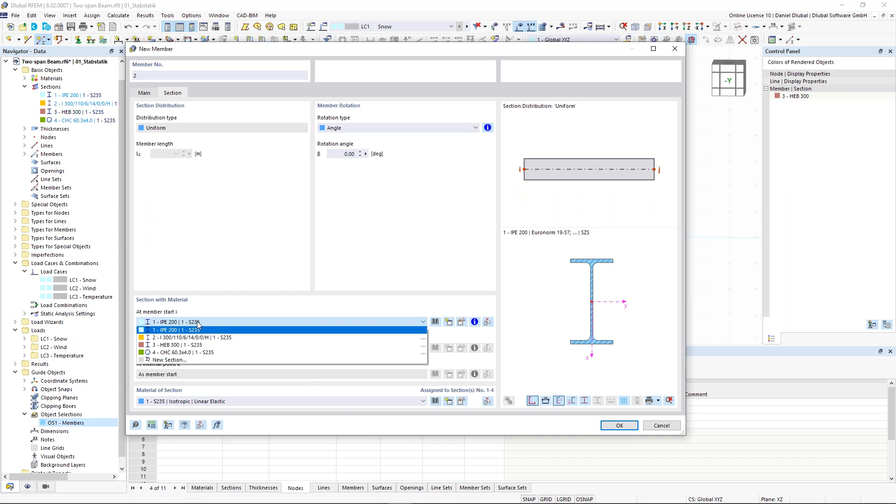But I have here these nodes, and this is pretty nice because then I can refer to this structure more easily and see the results more easily. So the next thing is that we create another kind of member. In this case, the truss, only normal forces. Section is in this case this IPE 200 profile because it's a little bit smaller.

And now I just choose here the length and direction, 1 meter, and go here 1 meter upwards. Here again. And now I want to create here also a member. I choose here these two nodes and these two nodes by clicking on the Control key.

Right click on one of the nodes. I say move and copy. Now I can create a copy of the selected nodes. I say yes, I want to activate it. I choose here the displacement vector at the Z, and this is 2.3 meters. I say okay.

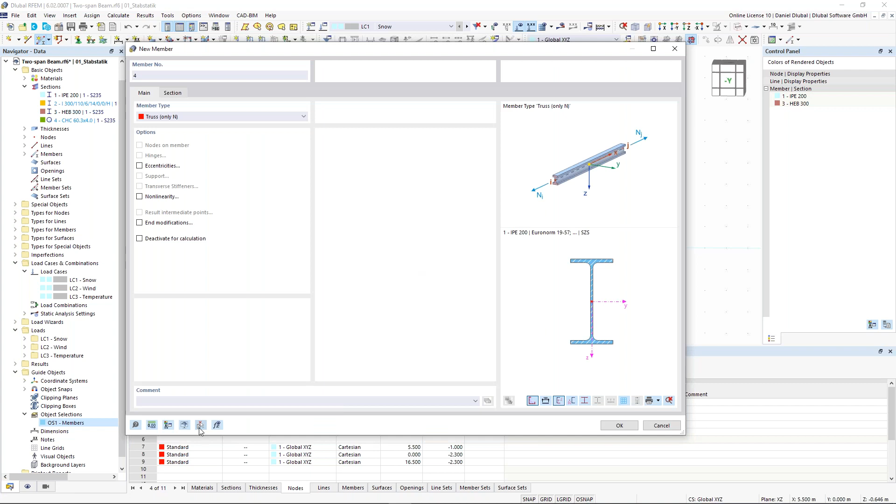And now I will connect these two lines. So I take here this beam. In this case, the truss only N, and I refer to this cross section. So I choose here always this select object properties in graphic. I click on OK. Now I draw it. So perfect.

So I change here the display model, and now I see that these local node coordinates are incorrect. So I want to change them. I double click on one of these nodes, and I can change here the coordinates, and in this case I want to change them at -1.4, so it goes a little bit upwards. I say okay, and now the structure looks like that.

Now I have to assign some nodal supports. I choose here these nodes, give them this fixed support, and the same here for this one. This will be a roller support in X direction. Okay, and now I create also a new member load. I go here, click on new member load, enter here a value of 15 kilonewton per meter, click on OK, and choose here this member.

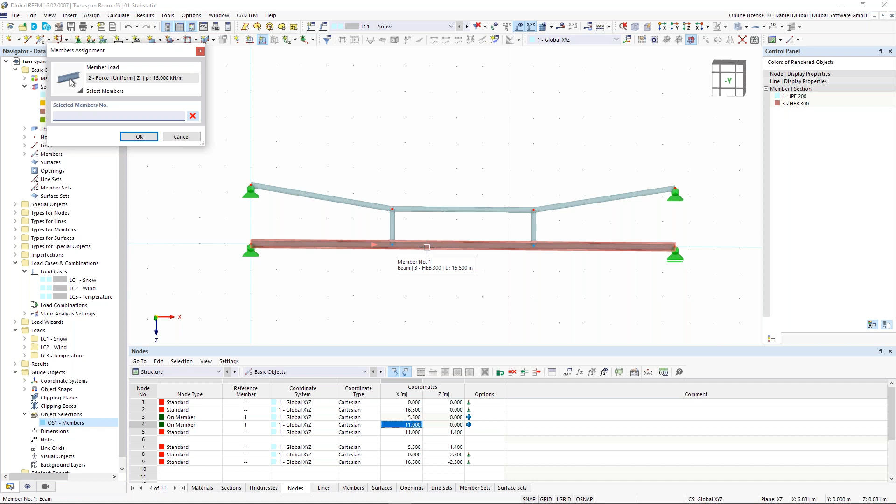The high advantage of this division of intermediate nodes is that I can assign this load and apply this load to one member. I don't have to click on these three members. This is one of the advantages when I divide the beam into one beam. So I divide this beam into internal two nodes, but the beam will consist as one beam. This is a high advantage in RFEM. Also the loads I can show a little bit smarter.

Yeah, now I calculate the result. Say yes. And now you see here the result. You see here the tension forces, because we have here activated the normal forces and also the bending moment. And this example is pretty nice because it shows the following thing.

When I take a closer look at the deformation, you see, due to the load applying on the beam, it deforms it downwards. But we have here these tension members which carry the beam, and this is also the reason why these things get tension forces.

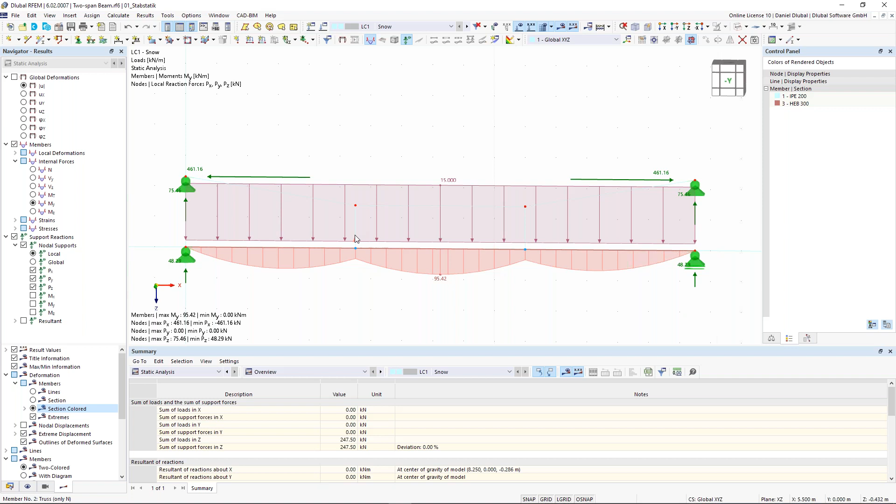And this explains also this interesting bending moment distribution, because here we get additional normal forces. You can see it as an additional support, and this is the reason why the bending moment looks here so nice. Also the normal forces. Okay.

So we last do have an example. Question - yes, Daniel, real quick about this example.

I got a pretty interesting question about how we would model a double beam if for some reason the bottom chord fails, and it's already in place, and an engineer decides to add another beam. How would you model that in RFEM? Would you add another beam over the old beam, or how would you try to model that?

I'm not sure I understand the question, but if you do understand, maybe you could answer it. If you already have an old beam as the bottom chord and you want to add another one in real life, how would you model that in RFEM? From what I can answer, I think you can either edit the beam or edit the section, or if you want to add another beam, logically speaking, you would need different nodes, because you can't just pretend that two beams are connected to the same point.

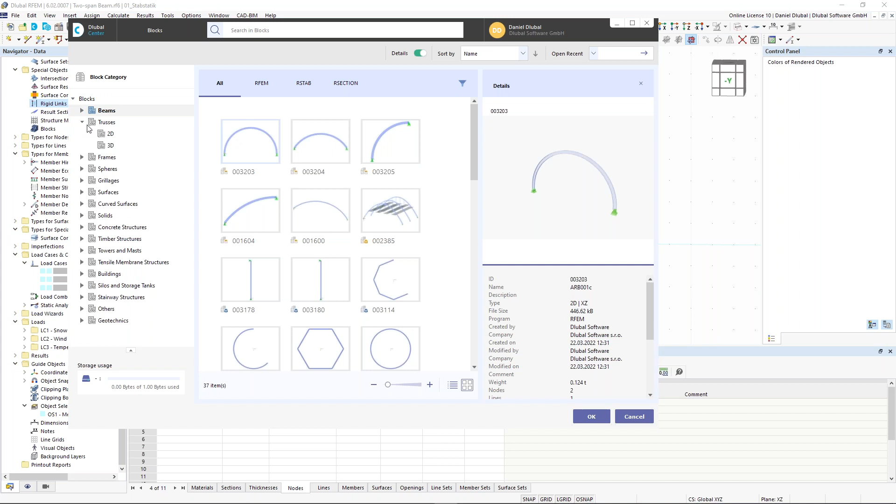So here in the Dlubal Center we have blocks, and there I can create trusses, for example. I choose this 2D truss, and I can generate very easily by giving this block any parameters, this kind of truss. I click OK, and I choose this one - I say yes, because now the block requires model type 3D, which we will also use for our next examples.

So next we see this truss, pretty nice. For those who are familiar with programming languages and scripting, these kinds of blocks were created with the programming language JavaScript. So if you are familiar with JavaScript, you can also program your own blocks, and this is very powerful when you can do this.

This is also one of my future theories regarding the whole civil and structural engineering field - that students should know how to program, because then they have a real advantage modeling, defining and designing their structures with different parameters. So I can only recommend learning JavaScript or any other programming language, even if you are a structural engineer.

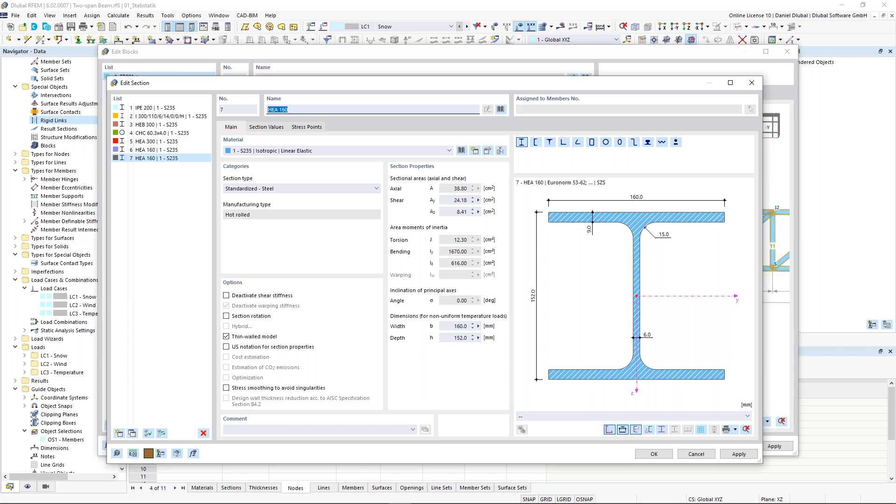And now I go here, HEA 300. Yeah, this is enough for me. Now I copy it and just rename it from 300 to 160. Same here, and then I copy the same thing here again. Now I will have here an IPE profile, also 160. This one, and I say okay.

Now I can assign the chords to my cross sections. For this one, I have this HEA 300. The bottom chord is the same profile. The diagonals have this HEA 160s, and the verticals, because they don't get so much forces, an HEA 160. Okay, then I click on OK.

And I see the structure here. Very nice, because I see all different cross-sections according to the cross-section with a different color. This makes it easier to see suddenly the correct cross-section. Yeah, and you see, okay, the trusses are modeled as members with hinges.

So what you can do is selecting all members, double click on that, and give them here this truss behavior, and then you have the same effect. Okay, so much to that.

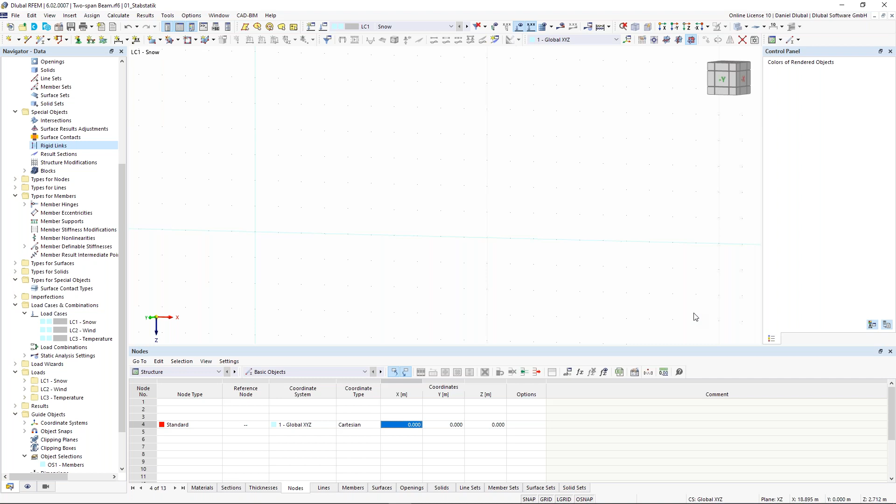So for that, I will model a very easy Euler case. It's just a fixed cantilever column. So I create this one. I click on beam, and now the section will be an HEB profile. I click on OK. 10 meters high.

Now we need here a fixed support, and on the top we need a single load. In this case, I give here 100 kilonewton as vertical load, and also a small horizontal load in order to see the effects of the analysis according to the second order. I click on OK.

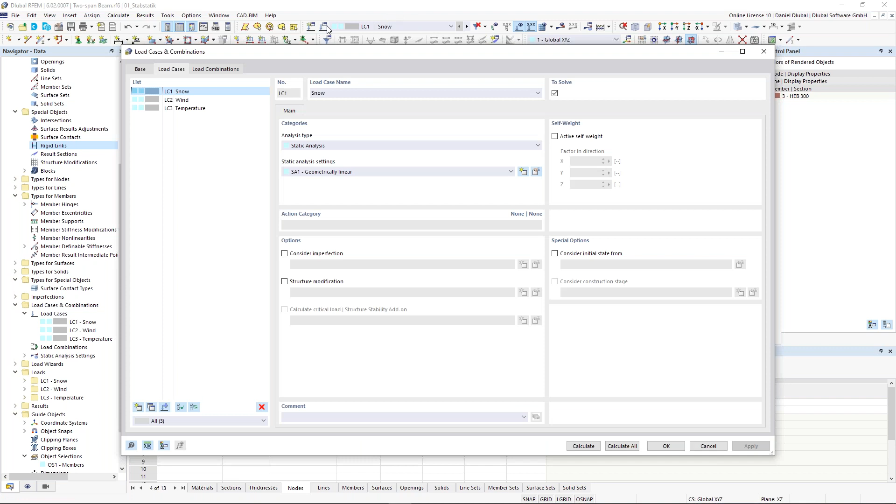Now it will be interesting. Oh sorry, this is not correct. This one, I have to assign this one to the number 2. Now I go to the load cases, because in the load cases I can assign the static analysis. So first of all, I will change here these 2 load cases, and I say that theory first order, and this one will be the second order.

So here you can see static analysis settings. I have here a geometrical linear. So in general, load cases are calculated according to theory first order, so I have a geometrical linear calculation. When I want to consider P-delta, or the second order, I have to change here the static analysis setting. And normally load combinations are calculated according to the second order.

So I activate it. I go here to load case 1. Okay, you see here the load case 2 and load case 1. And now I want to calculate both load cases, and then I will show you the differences in the calculation. I say calculate all.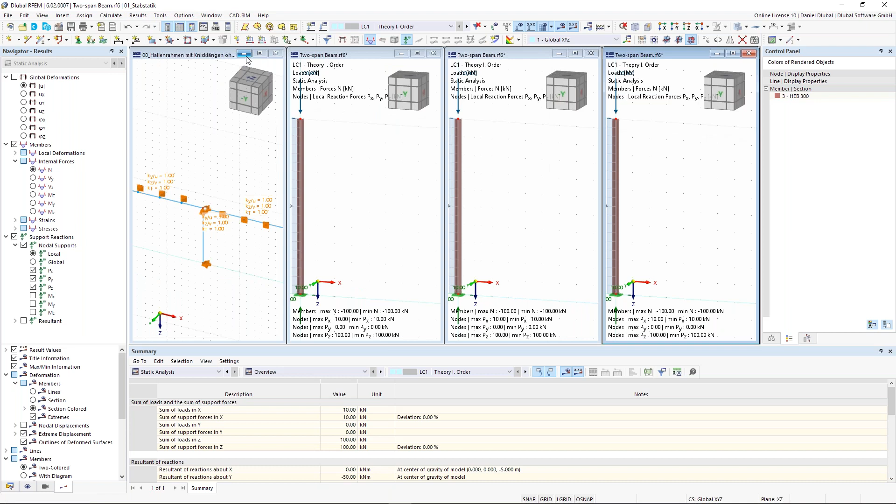So, okay, now I will create new windows. I will create a new window here, and again, now I can show several windows vertically. This one I don't need. So again, perfect. So this will take a little bit. Here the same.

Okay good, here we have the results of the first order, and here we show the results of the second order. So first of all, the normal forces, but for this fixed cantilever column, the bending moment is more interesting for me.

Okay, so let's take a brief look. I think calculating the bending moment of this cantilever column is no big problem, because 10 meters times 10, so 10 kilonewton times 10 meters, so the height, this is my bending moment here at the support. This is according to the first order.

So when I calculate according to the first order analysis, then the program makes the equilibrium at the undeformed system. When I calculate according to the second order analysis, then the program makes the equilibrium at the deformed system. So you see here the differences. Here, first order, 100 kilonewton meter, and here, 106 kilonewton meter. So we get more moments.

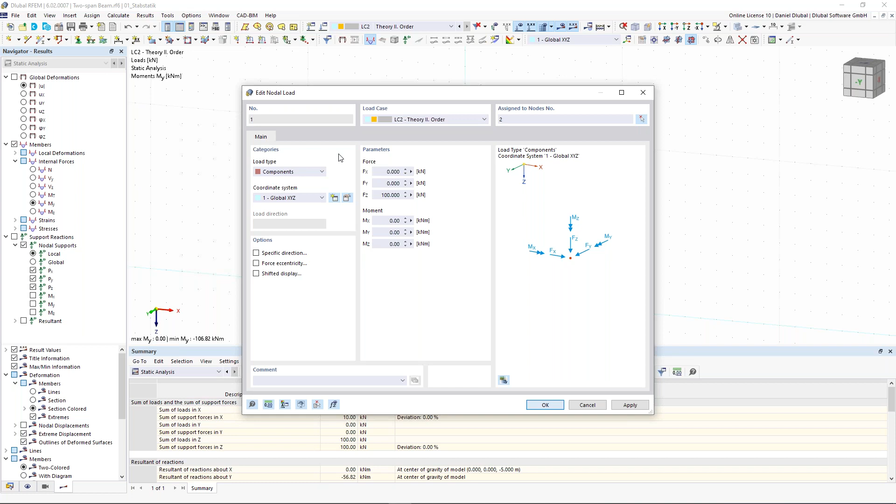I will leave here this example, but delete here the force in X direction. I say okay. And here the same. Okay, so what I do now is performing a stability analysis.

And therefore I have to activate an additional add-on. I can go here to edit model base data, and I jump to the tab add-ons, and I activate here the structure stability.

So what does this add-on do? It performs according to the eigenvalue method buckling shapes or buckling forms, buckling lengths, and also critical load factors. So let's do this for this simple example, because everybody in your study has already calculated maybe a critical load for these Euler cases.

Yeah, we can do this also in RFEM. So let's go here to activate this load case, and the only thing you have to do, and this is almost nothing, just activate here the critical load with the Structure Stability add-on in the load case or also in the load combination. In this case, we make it easy. We will use the load case, and you can also edit it. So here, edit stability analysis settings.

We have here different stability analysis types, eigenvalue method, linear, non-linear. For our reasons, it's enough when we use this linear possibility. And here we can set up how many eigenvalues we want to have. For this simple Euler case, yeah, 4 are enough.

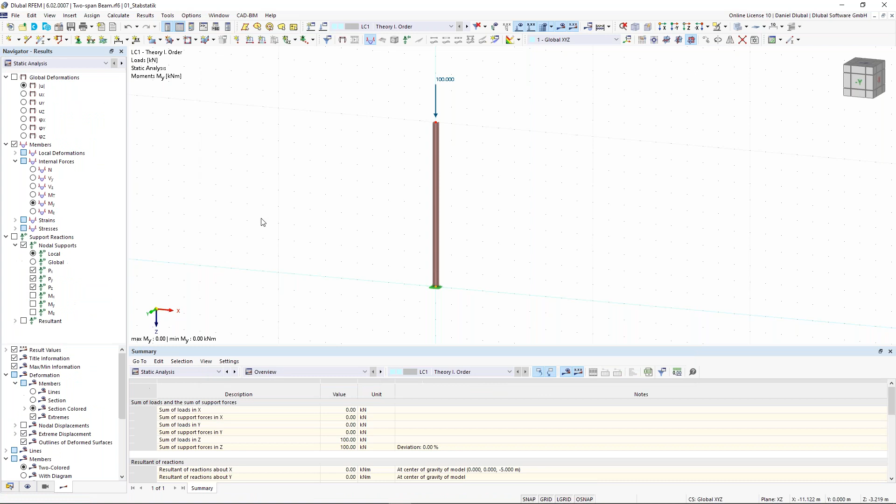Okay, and now let's take a close look to the results. We have here the summary, stability analysis, okay, and then also here on the left, stability analysis, also here in this pull down menu. And this is pretty easy. So when you want to get the normal results like internal forces, deformation, you go to the static analysis. And when you do a stability analysis, just go here and see the results.

So what can I see here? First of all, I activate here the control panel again. I will show me here this mode shapes in order to make the display factor a little bit bigger. So this is important to know.

The first eigenform or the buckling shape, yeah, it's this one. And why it's this one? Because the buckling shape said to me how the structure would fail when I would increase here this vertical load. And this would be the failure form, yeah?

And in this case, the profile would fail around its weak axis, yeah, because the flanges show to the X direction, and this is the stiffer direction. And so the first failure would be around its weak axis. And this would be the first eigenvalue, so the first eigenform. The second one would be around its strong axis. Yeah, this is interesting, but this is clear.

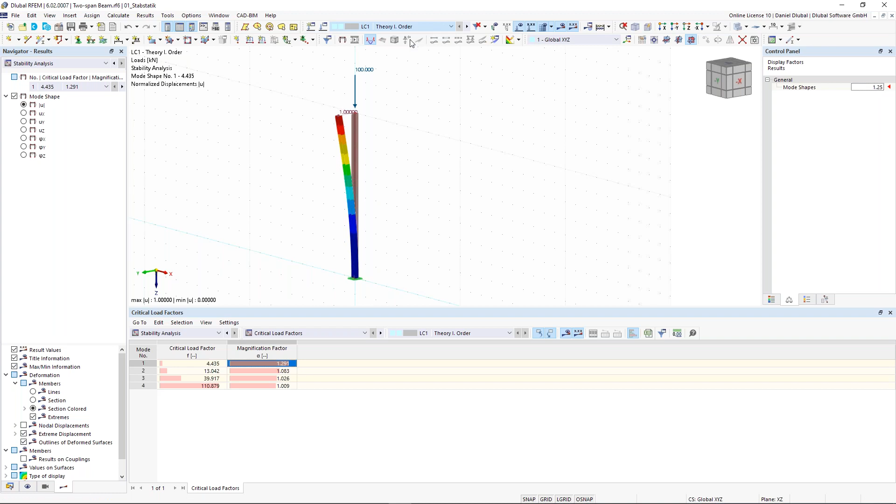So we said, okay, 4.435. So let's go to the theory second order and let's increase this load to 444 kilonewton, because then we are over this critical load factor. I click on OK. And I calculate it, say yes. And you see, okay, an error appears. Why? Because the stiffness matrix is singular, the structure is unstable.

Because the existing load is more critical than the capable critical load of this beam here. So when I want to take a closer look at the buckling length, I can go to results by members, go to effective lengths, critical loads, and here I see the effective length factor and also the effective length, and also the critical load.

So the first eigenmode shows me an effective length of 20 meters. So when I would perform a stability design in steel members, this would be the equivalent length when I would do it with an equivalent member method, and also the effective length factor, and also the critical load. And this is pretty interesting because the critical load is the 100 kilonewton, so the existing load on the structure, times the critical load factor.

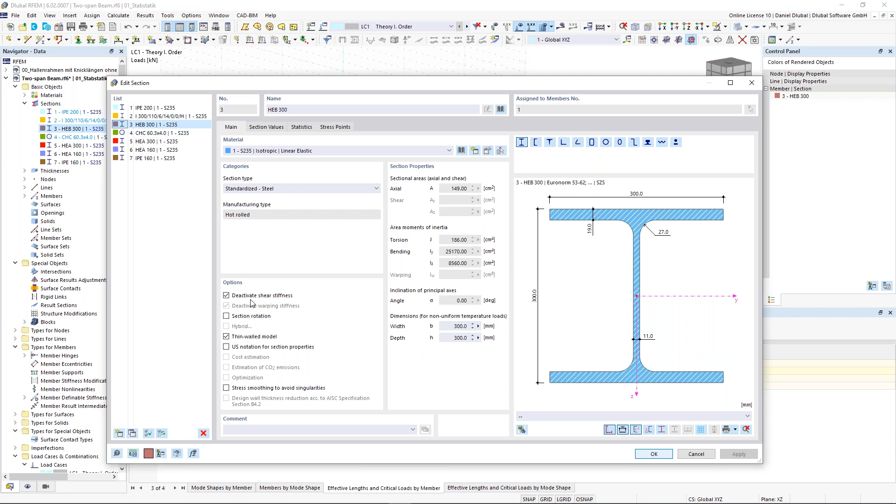So 20 meters, this is also the case for Euler case 1. When I would have an Euler case 2, then it would be 10 meters. An important note is that I have deactivated the shear stiffness in order to get the same results as in my hand calculation, but in reality you have a kind of shear activation of the profile. So this is also the reason why it's in general activated.

Okay, so last example, I have a fixed frame where we also take a closer look at the different buckling modes, buckling shapes, because then I guess it will be more clear. So what I will do is I copy the whole thing here. And now again, my favorite function, drag and drop 10 meters along the x-axis. I put here an additional girder. It is a beam. The section is an IPE 300.

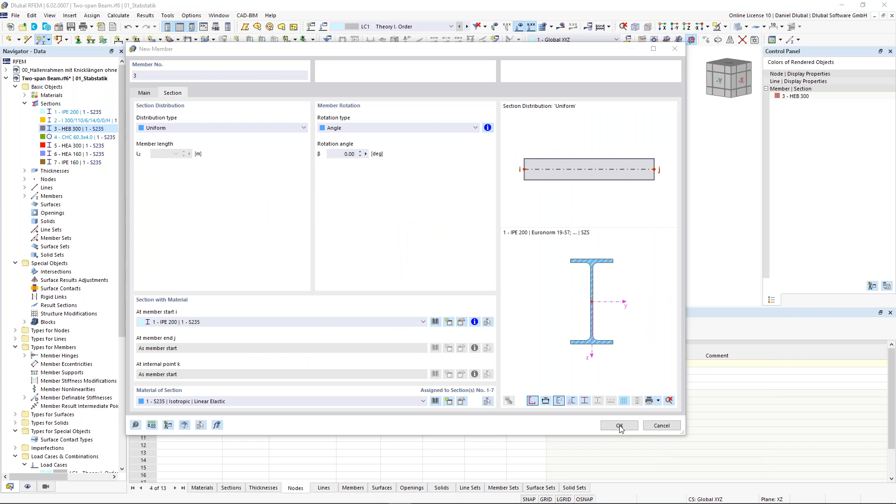I click on OK. And now I connect these two top nodes and change the height of the nodes to -6 meters in the Z direction. And now let's do the same as we had it for the Euler case 1. I go again to the theory first order, and now I activate 10 eigenvalues. And I say, okay, calculate it, please.

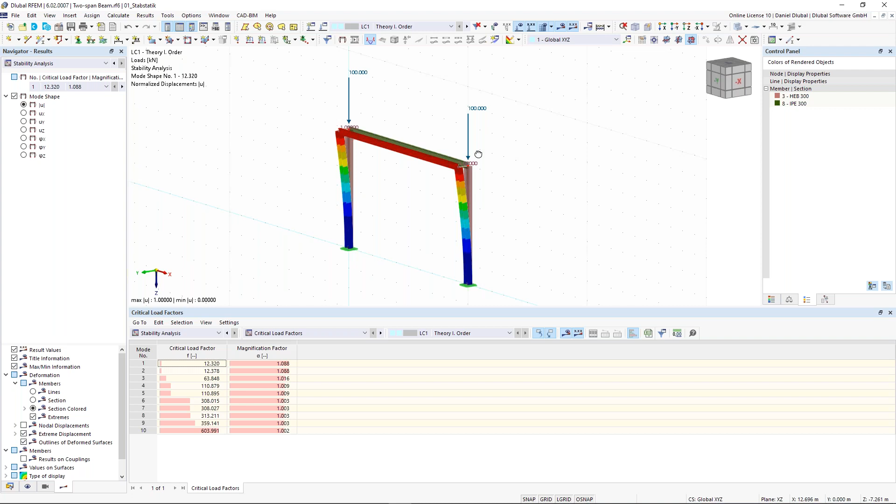So now let's take a closer look at the results of the stability analysis. What we see here is pretty interesting. Because we consider the 3D model type, we see that the first eigenvalue is a failure out of the plane. So I increase the display factor. So out of the plane. This is pretty interesting.

Why out of the plane? Because we have here a failure about the weak axis of our HEB profiles. So the next eigenvalue is also out of the plane. Also interesting.

And the next one is in the plane. Oh, okay. So if I were a structural engineer, what I would do is avoid the bending, avoid the failure out of the plane by adding some lateral support. Okay, so let's take a closer look at the

effective lengths. So when I would perform a stability design of steel members, I would take this effective length, and this is 2, because here we have our Euler case 1. So the next one, this one, for example, here we have buckling length mode 3 of 1.5 around the strong axis.

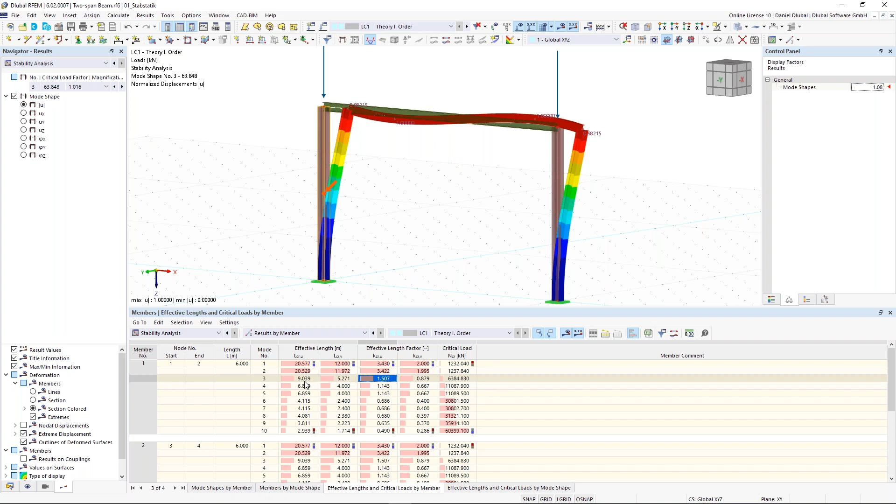So when I would do a stability analysis of this steel column, the equivalent length or effective length would be 9 meters here. So maybe you can also take another look at that one. Here, this is number 4. And here we see the effective length factor around the weak axis, in this case 0.67. It's almost Euler case 3.

So now I'm the structural designer, and I want to avoid the structural failure out of the plane. So what I do is add some lateral supports. I will add these nodes on the top, assign nodal supports, but only activate the U-Y direction, because this will be my lateral support. I click on OK. I calculate the whole thing again.

And one important thing is, don't mix the buckling shapes with the deformation shapes. This is a huge difference. I'll show you why. So this is the global deformation depending on these vertical loads. And the stability analysis, the buckling shape, is another one. So don't mix it up. So now we have the first eigenmode in the plane. This is maybe something we know from our studies. It looks like that.

And now the critical load factor out of the plane would be here, the second one, and I had to multiply this 100 kilonewton by 100 again in order to get a stability failure out of the plane. But this is quite unrealistic. But now you have a feeling for how the structure fails when it gets too much compression force. Okay, I think this was it.

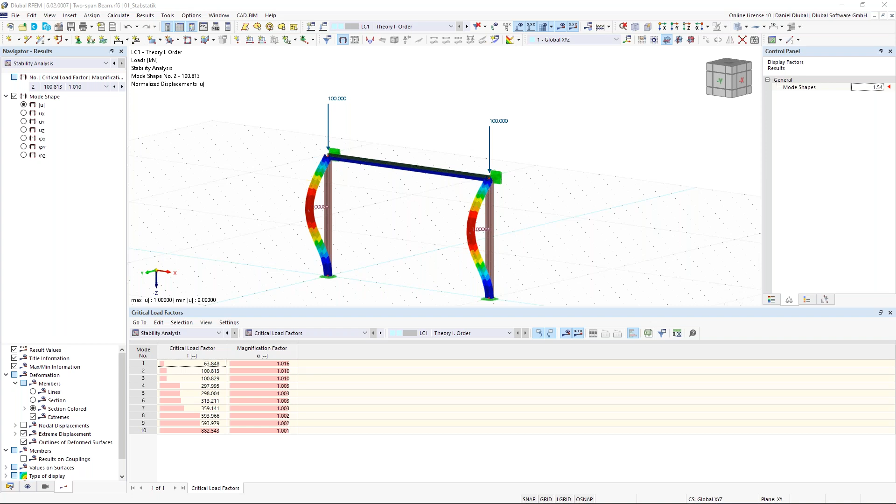You've explained everything pretty well, Daniel. We don't have any questions so far. If this is it, I would like to show our attendees a few things on our website. Yeah, okay, of course. You can take the control. You can assign the rights as moderator. Or I will give it to you. Just wait a moment. So now you can go forward. There you go. Now you can see my screen, right? Yes, I can see your screen.

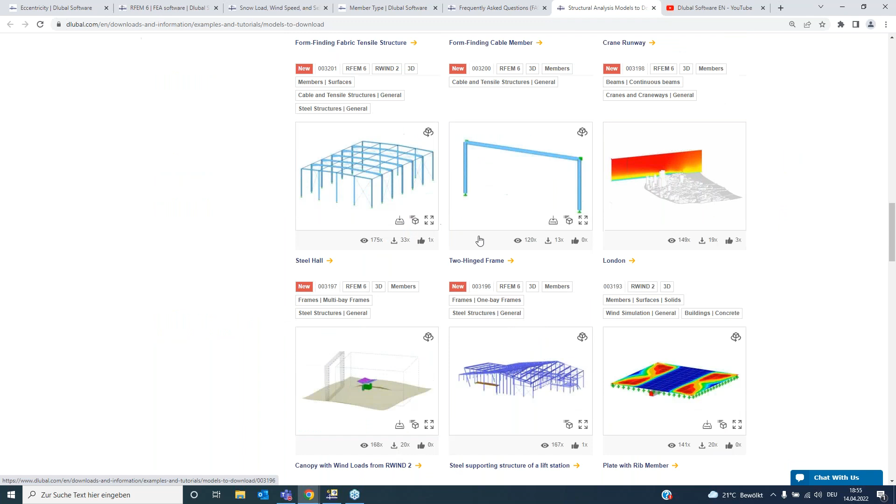Another really useful feature on our website is that you can download ready-to-use structural analysis models. You can see there's a really wide range of different types of models you can download. And by the way, this is really new. We started offering this like a month ago, I think, Daniel. We have opened the possibility for you to upload your own structural models. You can go to downloads and info and choose to submit your own structural analysis model.

For example, if you're feeling creative right after this online training and you want to try RFEM and make your own model, maybe you can submit it afterwards to our website, and we can post it on our social media as well.